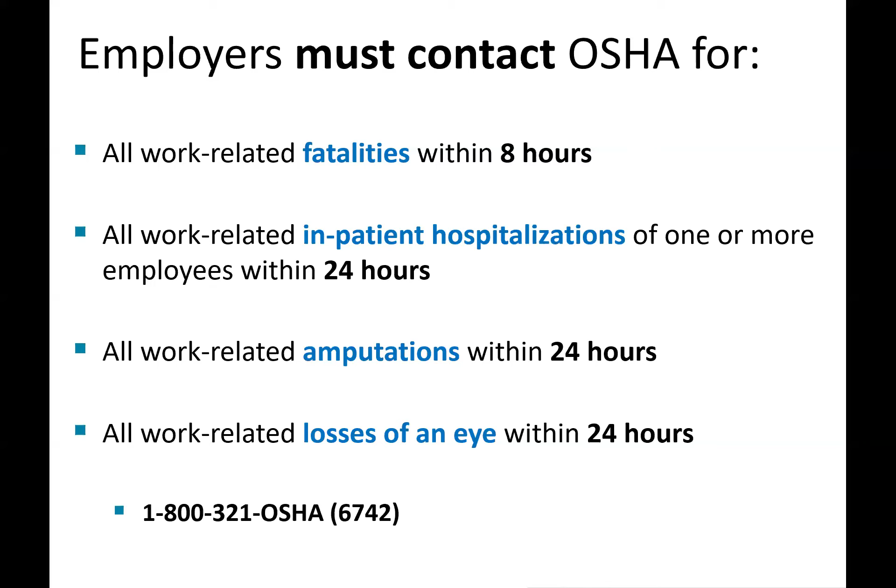If it happens after hours, depending on what you tell them, for example, if you said, hey, there's just been a work-related fatality at our workplace, they're going to wake somebody up or reach out through the phone tree until they reach somebody at the local OSHA office. So those are all parts of what's going to happen.

Then, of course, we're trying to figure out exactly how serious the hazard is that we might be looking at or that that employee might be exposed to. One of the statutory requirements is we have to show that the employer had knowledge of that situation or condition. And then, of course, we have to show that there's a feasible way to protect the employee. That ultimately falls on OSHA's responsibility to show that whatever we're going to ask the employer to do to prevent that hazard is actually feasible. So those are all parts of what will happen on an OSHA inspection.

So let's just take an example, because perhaps maybe even you've done something as silly as this, getting up on the top step of a ladder. We would see something like that as a hazard. But in order to say it's an actual OSHA violation, we have to go through those previous steps. Is there an employer-employee relationship? So if this is a person who works for themselves and doesn't have that employer-employee relationship, we would not have jurisdiction. Next, we have to show the seriousness of the hazard. And of course, a 6 or 8 foot fall hazard certainly rises to that occasion for us.

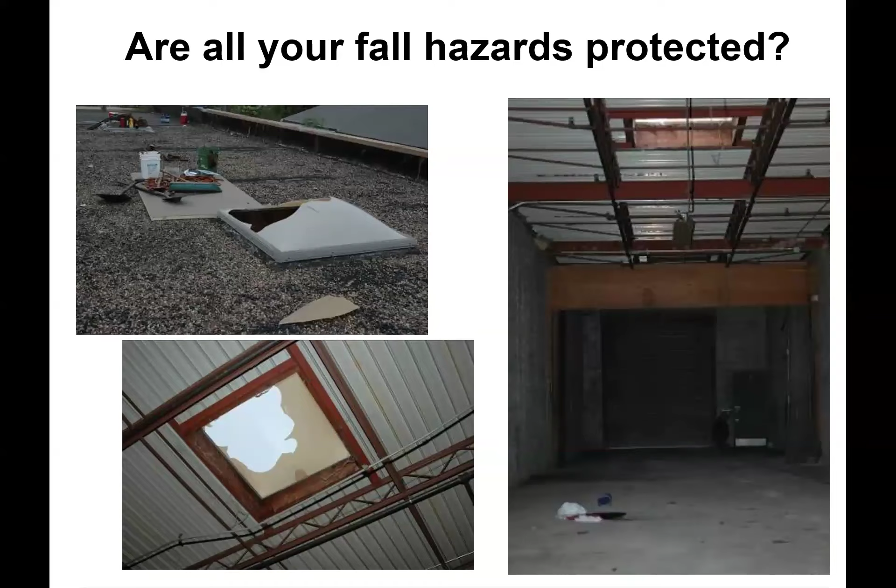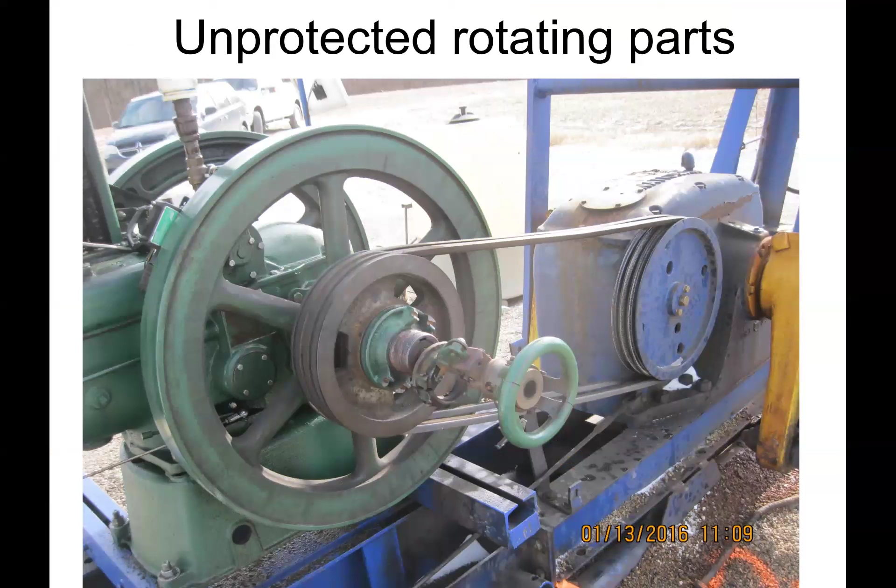We had an employee who was caught in rotating parts. This was another fatality investigation that we did. An employee who was engaging the clutch came in contact with those rotating parts. He ended up getting wound up in the material. These are the sorts of things we'd expect it to look like. We don't want to wait until there's a fatality to address those sorts of machine guarding hazards. So we'll address a lot of issues like that.

And then, of course, this takes us back to Illinois State University, actually on a Christmas day, where some ice had gotten behind the concrete near Hovey Hall. The concrete had broken off, and they were concerned about it falling down further. So they hired a company to come out and pick up the material. As they went to pick up the material, the strap that they used burst, and the concrete came into the cab and killed an employee. And so we want to make sure that anytime you are near, as a person who might be also inspecting those areas, and you see these sorts of things, you recognize that hazard.

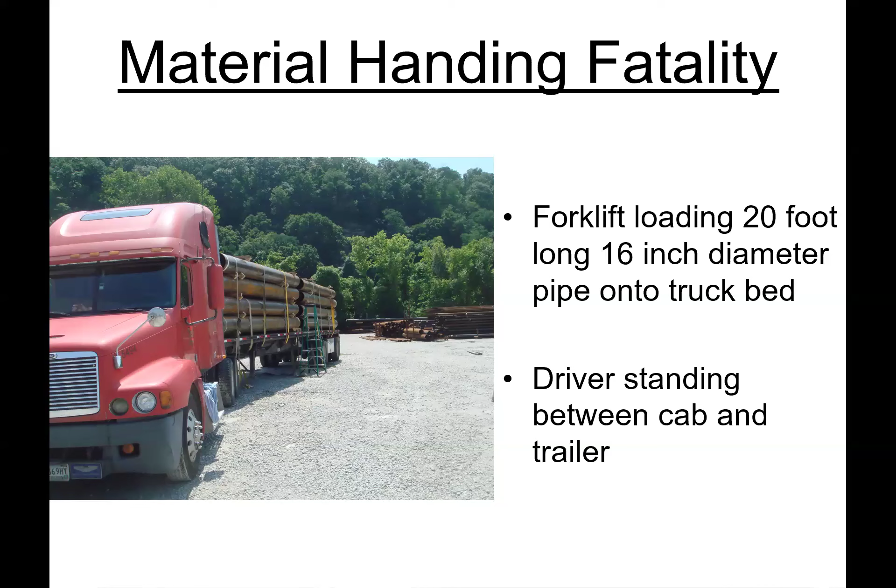In this particular fatality, the truck driver is standing between the cab and the trailer, just off to the side. As an employee goes to lift up the load, one of the straps breaks, that pipe comes down and crushes the employee. So we want to make sure everybody recognizes that anytime you're moving materials, you have the types of stuff that could become a crushing hazard. You recognize that and stay in a safe area for those sorts of things.

So those are all sorts of things that we routinely have dealt with fatalities that, to somebody who doesn't deal with it all the time, may be all too common and not recognized as a hazard. I wanted to share some of those horrible stories so hopefully everybody recognizes them going forward.

So let's talk about some of the common citations we've issued in the past for the types of work areas we'll be talking about today. Excavation hazards, we'll go through some of those specifics in just a second. We've already talked about the fall and ladder hazards we routinely see, including going into an excavation. If they put a ladder into the bottom of the excavation, we want that ladder to extend at least 3 feet over the edge of the surface to the level ground for that sort of stuff.

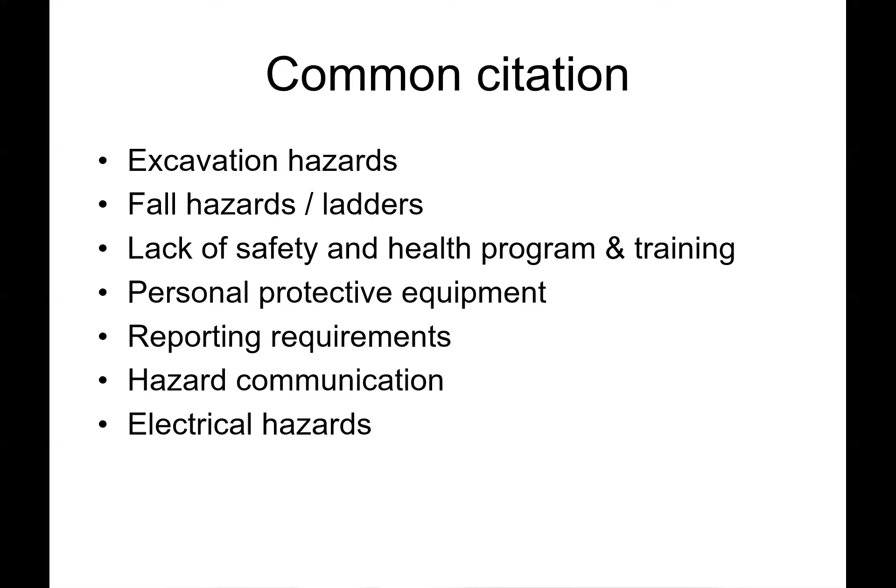Not having a basic safety and health program and training for employees is something we've often issued citations on. There are personal protective requirements that might be appropriate for the work they're doing. Reporting requirements, especially if they've had a severe injury that required hospitalization. Hazard communication, depending on if the employer is using hazardous chemicals at all during the work. Even sealers, some of the stuff like caulks, are considered hazardous chemicals. So we'll talk about hazard communication here in just a second. And then, of course, those electrical hazards that we've already touched on.

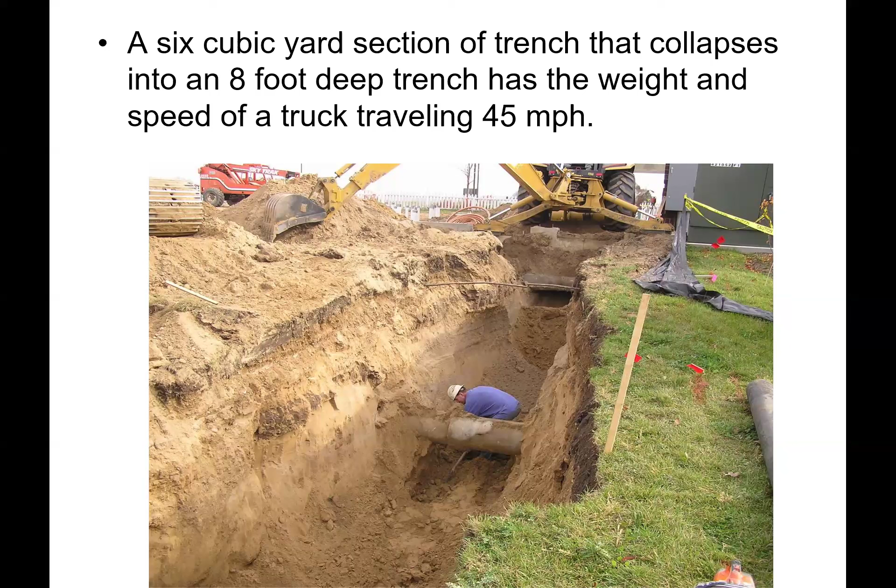So it's critical to make sure people recognize that we need to have a competent person who designs this excavation, making sure we have appropriate shielding, shoring, or sloping to keep people out of harm's way.

Typically, if you have plenty of space and don't have a building right next to it or things like that, we see a lot of people simply using the sloping method based on the soil type. But you have to be able to decide what that soil type is as you're doing that sort of work.

Anytime your excavation is even less than 5 feet, you still have to be doing those regular inspections. The OSHA standard absolutely requires one of those forms of sloping or shoring once you get 5 feet deep. But even at less than 5 feet, it still requires regular examination because, as I'll show you in a little bit, sometimes the excavation doesn't cave in totally.

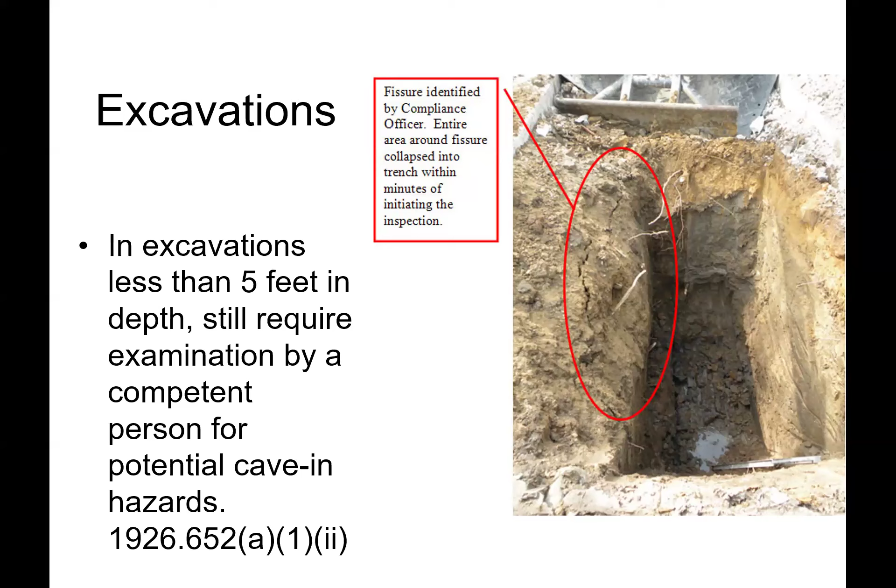Sometimes just chunks of material will fall off. So if you ever see any sort of fissuring or stuff like this, like you see in the circled area, those are some of the hot button items for us. You'd want to make sure you're protected or staying out of harm's way.

On the other end of it, we have what's called a plumb bob attached to a rope. And then, of course, we use basic geometry to show the depth of the excavation and that slope of that wall. We also have devices like an angle indicator that will tell us those sorts of things so that we know exactly what is the slope of the wall.

And then, of course, based on the type of soil that you have, that will determine what the appropriate slope or angles are. There's a test called the thumb penetration test that you can do to try to determine which type of soil you have.

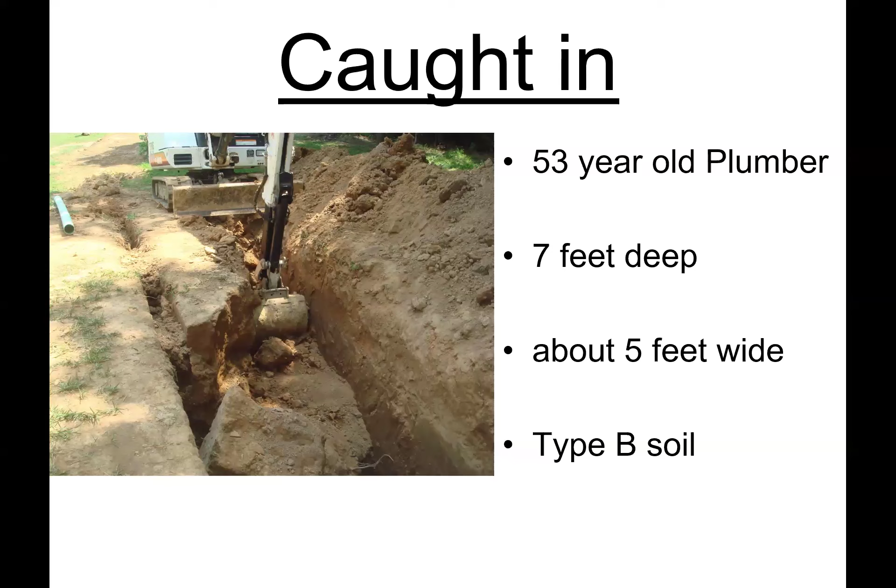He was able to get out of the excavation, but it was a serious enough injury that he ended up dying from the internal bleeding. So it's those sorts of things that, even though he may not have been covered up by the soil, there's all those sorts of things that can occur. We want to make sure people are certainly protected from those sorts of areas.

A couple other things we see with excavations: we want to make sure that anytime an excavation is 4 feet deep or greater, there's a safe way to get in and out of that excavation. A ladder is typically fine to use as long as you can safely use that ladder in and out.

What we don't want to see is people riding in those excavator buckets. We have a long history of serious injuries and fatalities from people riding up, down, and even horizontally for some distance in those buckets.

So that'll take you through some of the issues we've had with excavations. If you have any specific questions, feel free to write them in the chat, and we'll make sure we get those answered here at the end.

The other thing I touched on, a common OSHA violation, is the hazard communication program. It makes the top 10 OSHA violations each year. We expect that any employer using hazardous chemicals develops a list of what chemicals they have, ensures those containers are labeled, obtains a safety data sheet for the different hazardous products they have, provides training to employees, and has a mechanism to train employees on any non-routine tasks they might do from time to time.

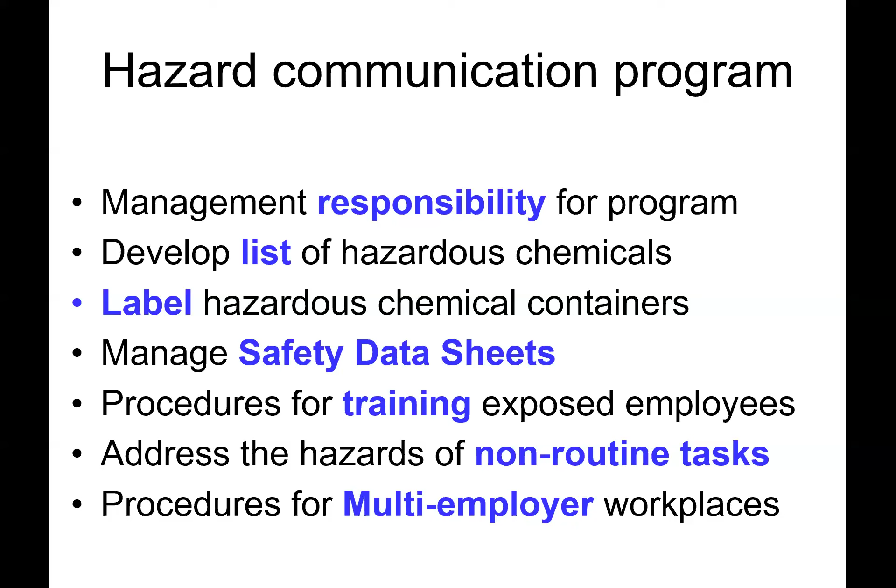And if there are separate contractors, say 2 or 3 different contractors working at a site, we would expect them to share information about any hazardous chemicals that the other employees might be exposed to.

In 2012, OSHA updated their hazard communication standard to include what we call the globally harmonized system. DOT, OSHA, all updated their labeling expectations to address that it's okay to use these pictograms in lieu of some of the basic words for the hazards.

As we talked about earlier with some of the electrical hazards, certainly one issue we run into is where are the power lines. We expect that the employer stays at least 10 feet away from the power lines at all times. If they say the work they're going to be doing will put them closer than that...

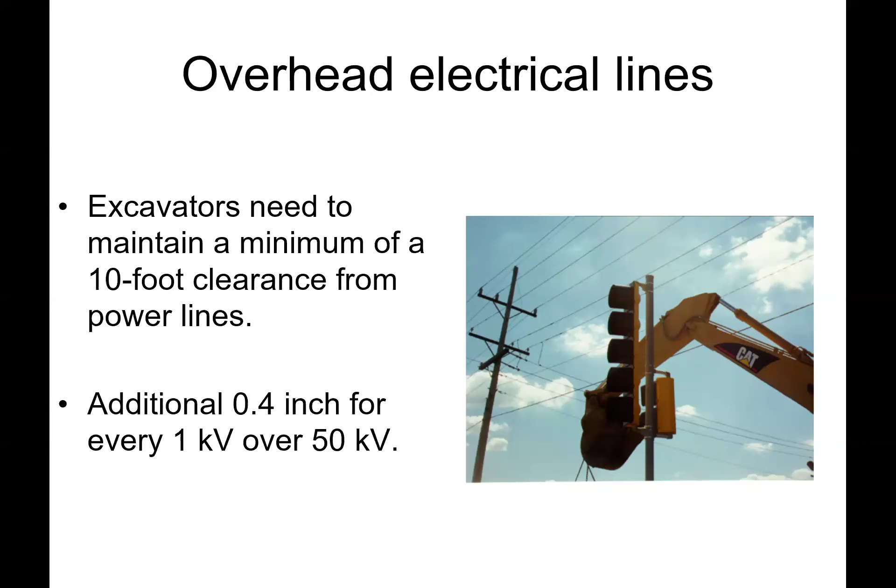If you're in central Illinois, you can contact Ameren. Throughout the state, depending on where you are, you can contact the local entity that has jurisdiction over the power lines, and they will either figure out a way to shut it off or cover it so it can be protected while they're doing the work.

The other thing we routinely look at is they may have a need for power at the site and are using a generator. Anytime you're working at a construction site, we expect the electrical to be protected with a ground fault circuit interrupter. Unfortunately, a lot of generators don't have a ground fault circuit interrupter built in. So in those cases, they make a pigtail that has a ground fault circuit interrupter, and they can plug in any electrical equipment they need into that pigtail to provide safe electrical power throughout that work site.

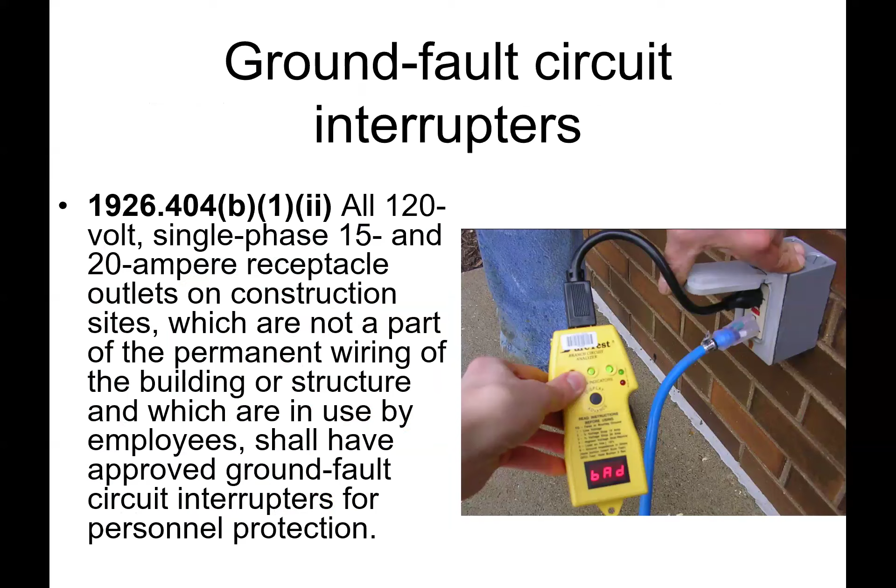As you heard earlier, one of the top 4 things that kills people is electrocution. So it's not unusual for us to check to make sure that ground fault circuit interrupter is working and working appropriately. The other thing we always look at is the extension cords that happen to be in use.

The other things that can come up are employees being exposed to injuries when there's a problem with either a piece of equipment or something going on in that work area. We want to make sure that while they're trying to do any sort of unjamming of the equipment or any servicing activity, that piece of equipment is locked out.

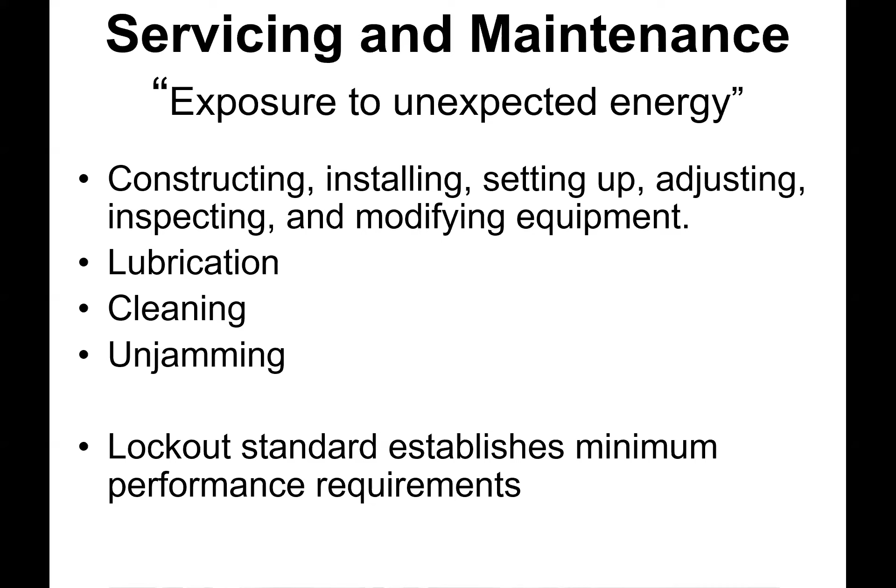So it will not present a hazard to the employees as they're doing that work. Lockout can apply to construction activities, but it's usually during cleaning and unjamming activities that we see the most significant amount of hazards.

The basics of lockout is we expect there's a program or system in place to make sure those energy sources are isolated, and that the employer does a check to make sure that energy is no longer functioning. It's easy to recognize when electricity is no longer on, and here's our test.

Oftentimes, if it was something like a furnace, we can shut down the gas line and then burn the rest of that fuel out of that pipe. But there are ways to release or relieve it. And so those are the sorts of things we want to make sure people are doing so that there isn't a hazard in the workplace.

Next, I did want to touch on confined space because it's always one of those things you could encounter, and I just wanted to give you a couple of examples. The basics that we see related to confined space fatalities—oftentimes it's because they didn't recognize the hazards. Other times, they recognize there was a particular potential for a hazard and they don't eliminate it.

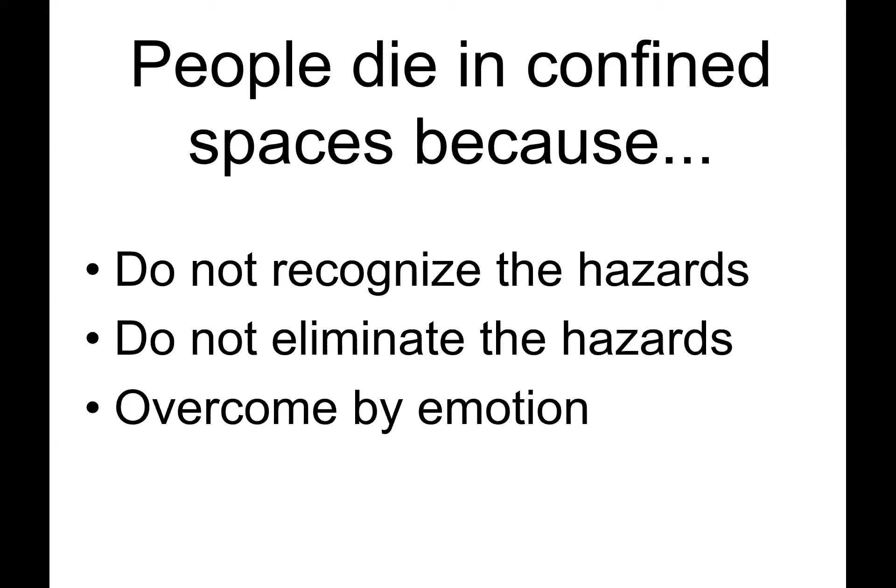And then the third way people unfortunately die is they're overcome by emotion. You've probably heard stories where there was a manure pit, they see somebody down in there, and another family member tries to go down and save them, and they also end up dying from, say, hydrogen sulfide or something that happens to be in that space.

So it's critical to make sure employees recognize in confined spaces the proper steps. Part of the reason I wanted to share this with you is so that you recognize you can't just jump down in there and try to save them. You have to take appropriate steps, like calling emergency services, who will have the ability to put on an SCBA and go into an area that has a hazardous atmosphere.

So we'll talk about our first one here. This is a concrete vault. They had performed a patch—you can see on the right-hand side—where they had a hole after installing the piping system, and they put the patch on that Friday. Over the weekend, they put this lid back on the opening so that none of the neighborhood kids or anybody would get into that area. Then Monday they come back to check on it. The employee climbs down into this vault and faints.

And the employer does not have a good rescue practice in place. They did call 911, but by the time the fire department got there, was able to package the employee up and get him out, he died from that inhalation hazard. So what we have to look at is what caused this inhalation hazard.

Concrete is a notorious oxidizer. And if you remember your 5th grade science, oxidizer means it's using up the oxygen. So as that concrete dries, it uses up the oxygen in the space. So in the simplest form, there wasn't adequate oxygen in the space.

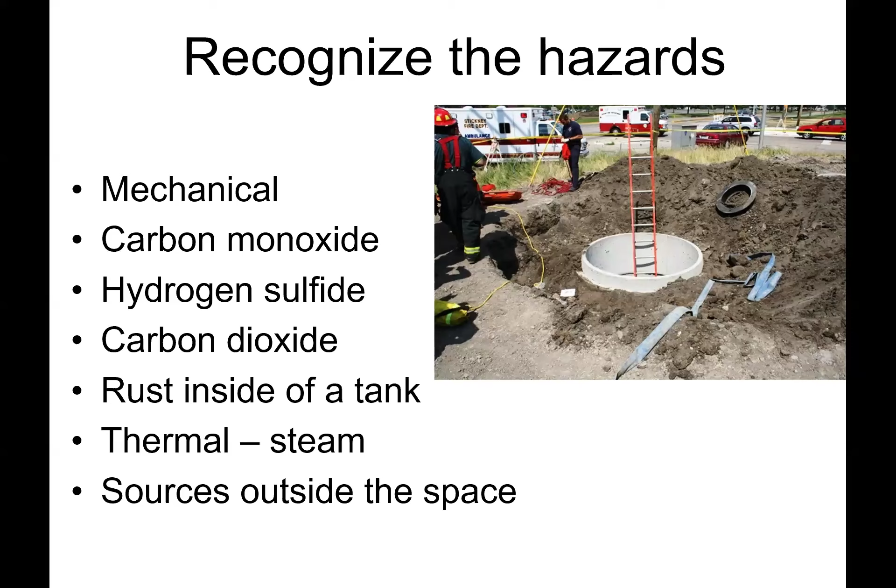Anytime you see rust inside of a tank, that's the same thing we're looking at with this concrete, right? Rust is using up the oxygen, and that's always a concern for those sorts of things. And then, of course, depending on what's in those lines, if you happen to have steam or things like that, if released, that could present an immediate danger to the employees. Those are all the sorts of things we want to make sure people recognize. And then, of course, you could have sources from outside the space that could cause that.

So I did want to share one other story. This involved two employees servicing an irrigation well in Havana, Illinois. That's what it looks like inside the space. We'll presume in this particular case that they did do an air sample. They had a device and the opportunity to do air sampling. They didn't write down what the results were, but we'll presume for the sake of the story that they had done air testing and it was fine, because it's very plausible that it was.

But when the first employee goes in there and does some work, there's some rotting leaves and a slurry of liquid and mud down in there. As you walk around in this area and do the work, it's not unusual for you to release some level of hydrogen sulfide. Hydrogen sulfide's immediately dangerous to life and health level is 100 parts per million, which is a relatively low limit for those sorts of things.

Perhaps the first person simply fainted. His friend and co-worker sees the employee go down and immediately jumps down there to help him. We ended up with a double fatality, with both employees asphyxiated by hydrogen sulfide that quite possibly initially didn't even show up on their air monitoring results.

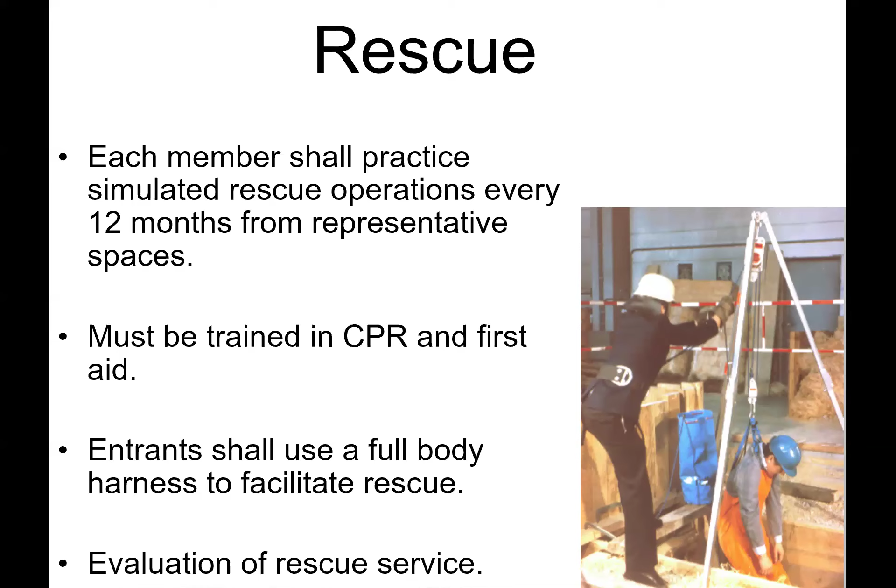So it's critical to make sure that not only are you doing the air monitoring, but you have a good way to rescue, and then do regular checks. When we talk about rescue, like the tanks we've just seen before, they make a wide variety of different tripods that can be used with mechanical assist to quickly pull that person out. OSHA requires them to at least practice that activity from a representative type of space at least once a year.

It's called Table 1 of our silica standard, which spells out specific protocols. So if you're using a saw integrated with a water system that continuously feeds water to the blade, and you're using it outdoors for less than 4 hours, we don't even require you to wear respiratory protection.

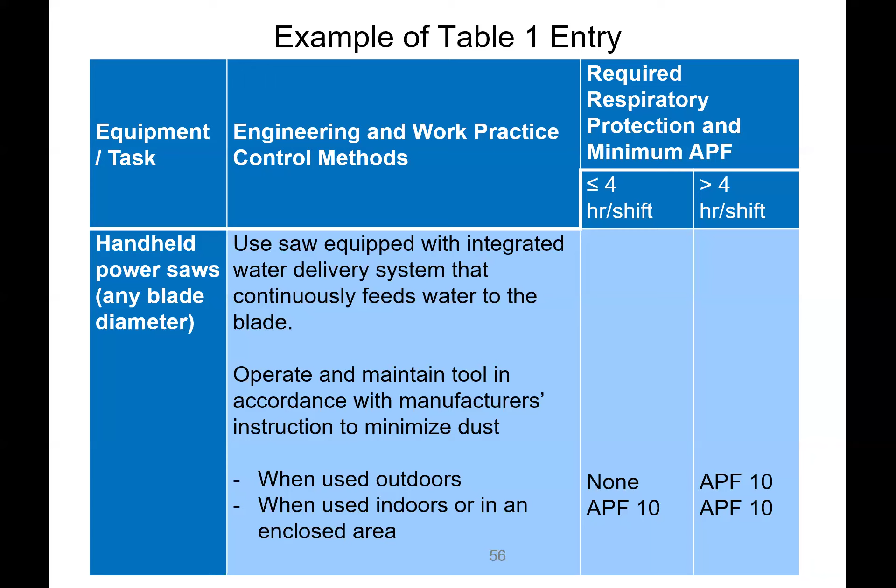But if you're going to be doing it for more than 4 hours, or you're going to be doing it inside, we want to make sure, even though you're using the water, that you're wearing appropriate respiratory protection. And we have some guides that will help employers for doing those sorts of things.

Noise, as we talked about, is also a significant issue for us. If employees are exposed as a time-weighted average above 85 decibels, we want to make sure that they're included in what we call a hearing conservation program, which includes a regular audiometric test for the employees, making sure they select the right type of hearing protection for those exposures, whether it be plugs or muffs or both if it's super high levels of exposure.

And then, of course, every summer, we end up trying to deal with heat as effectively as we can. This last summer, the agency actually put out a proposed standard recommending a written heat illness prevention program that addresses acclimatizing new workers, making sure that there's a clear plan of action to make sure that people are drinking water, are being appropriately hydrated, making sure that everybody understands the signs and symptoms of heat-related illnesses,

and that there's a system in place to check on workers that would also make sure that if an employee does initially start to have signs or symptoms of heat-related illnesses, you have a plan of action to get them checked out by a medical professional, and/or if something worse happens, a good plan of action for emergencies so that you can get them to the medical professional quickly. And then ultimately, everybody has an understanding of here's how our process is going to work at our workplace.

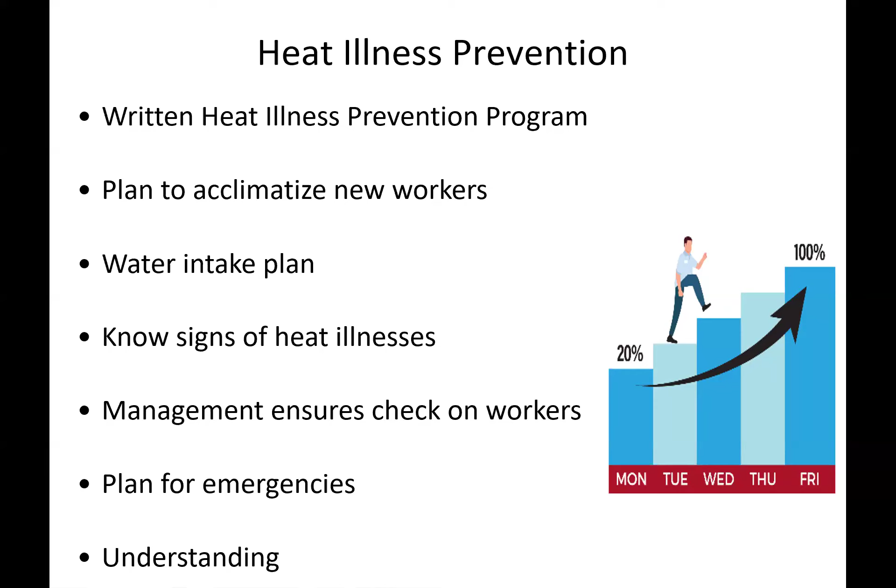And so the same thing would apply to you guys as inspectors who are out there working in a hot environment for those sorts of things. We want to make sure that you're appropriately protected as it relates to these issues.

Now, obviously, I can't make you an OSHA expert in less than an hour, but if you do end up having questions, whether it be on any aspect, or you're just concerned about a workplace that you've run across in your work and want to ask, is this something we should be making a referral on? By all means, here's my direct line. And that's my email address. You can contact me and I will certainly get back to you as to OSHA's policies and/or our practices, or help make a referral if that's appropriate.

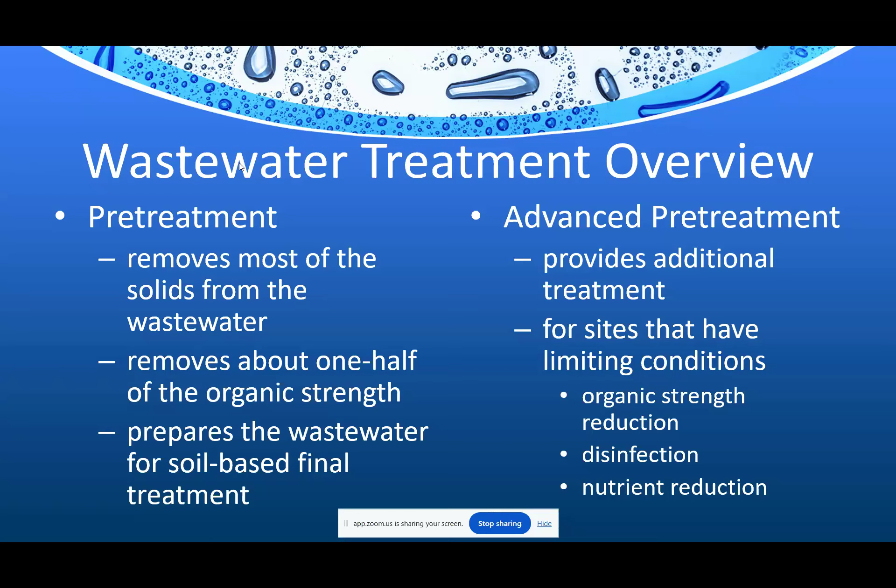We use the term strength to indicate the concentration of contaminants relative to average conditions. We expect that the rural convenience store that serves fountain drinks and greasy foods would have a greater concentration of organic compounds, sugars, and fats in wastewater. This wastewater would be considered high strength relative to organics. So we have basic treatments here, pre-treatment and advanced pre-treatment. What do we do to treat those? How do we go about doing it?

Then, final treatment for on-site wastewater treatment systems that use the soil. For final dispersal, the soil provides final treatment. There are billions of hungry microorganisms in the soil that like our wastewater. They break down many of the complex compounds into simpler, less toxic forms, such as carbon dioxide and water. So again, once that goes into the soil, that natural biology starts to take place and begins breaking all those down.

So, talking about a conventional treatment train. The word conventional is often used to describe an on-site wastewater treatment system that serves a single residence. The wastewater flows through the system by gravity, and the system consists of a collection network, a septic tank, and a soil treatment area. So you'll have your house, your septic tank, and then your drain field and soil treatment area where that water is being treated. Those microorganisms help break it down once it comes out of the septic tank, where some treatment is also taking place.

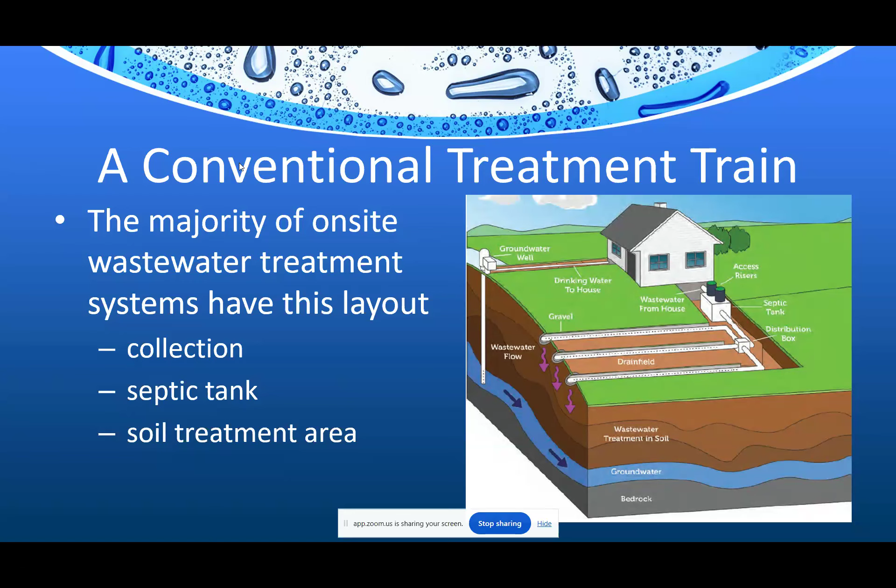Wastewater collection is the first step. The drain waste vent system in your house provides the service. Wastewater is then carried out of the house by the building sewer that conveys the wastewater to the next component of your treatment system. What are the ways we generate wastewater? Baths, we launder our clothes, we wash dishes, and of course, we dispose of the byproducts of our metabolism.

We often hear the terms black water and gray water. The terms only become important if we want to think about water reuse. Black water is from the toilet, kitchen sink, and dishwasher. The water contains pathogens and our heaviest concentration of other waste products. Gray water will contain more soaps and detergents. So again, thinking about those different types of water and what we want to consider when we think about reuse in the system.

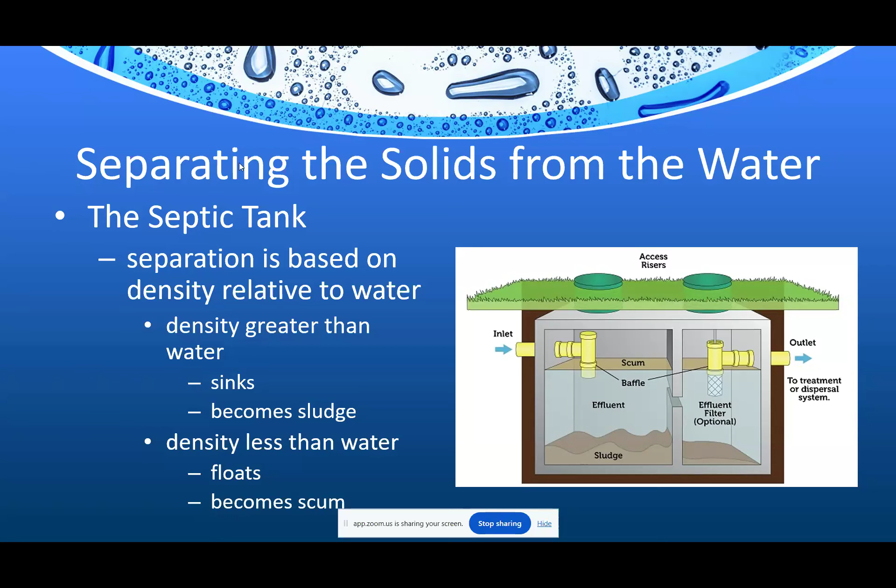Talking about inlets and outlet baffles. The liquid enters the tank through the inlet baffle. This baffle forces the water downward to encourage the settling of solids that are more dense than water. Solids that are less dense than water will rise. Solids that sink become sludge at the bottom of the tank. Products that float become the scum layer.

So again, thinking about your septic system there, we have that diagram there. You eventually separate it into the three layers where it comes out of that baffle, and then it separates. So you have the effluent in the middle. The bottom, those things that sink, eventually become sludge, and the top eventually becomes scum.

And that separation becomes really important because that's helping you separate out the negative things that you have within that septic tank. So a good septic tank, when it's doing its purpose, is exactly that. It's helping separate out those solids into that scum and sludge layer. So we have that effluent that can be treated through the septic system.

If the system is operating properly, the layer of water between the sludge layer and the scum layer will have the lowest solid content. The outlet baffle is placed so that only water from this clarified zone is allowed to leave the tank. So again, we had those two chambers here.

In the first chamber, we're doing our separation. Then we're letting that effluent flow, which has the lowest contaminant level, into our second chamber, which is then going out of the outlet baffle, going up into the other baffle, then out into the treatment field where the soils will start treating that effluent and getting out whatever remaining contaminants might be in there.

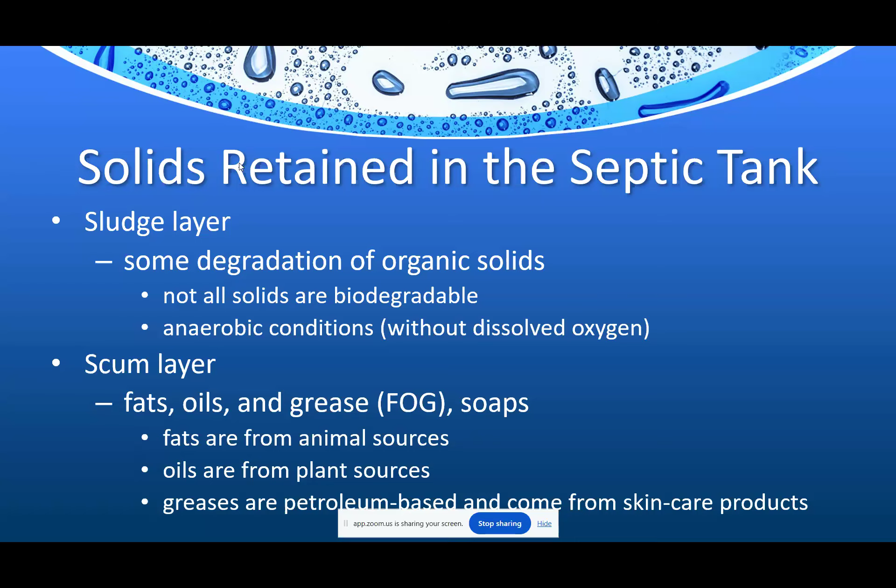We then have our clarified layer. The entrance to the outlet baffle is placed in the clarified zone. Some septic tanks have an additional screen built into the outlet baffle, some don't, depending on the age and exact model you have. The effluent screen provides an extra level of protection to prevent smaller solids from entering the soil treatment area.

We'll talk more about those screens, but the big thing to think about is that if you have one of those screens, you're preventing anything that could have floated through that effluent layer and gotten in there without being fully separated into the scum or sludge level.

As previously mentioned, some homes and businesses can produce wastewater that is too strong for the receiving soil. In these cases, additional pretreatment is added to the treatment system to reduce the strength.

You do have some of those pretreatments, which may involve a little bit more disinfection or a little bit more nutrient removal, as opposed to just doing it naturally.

We talked about organic strength reduction, often called ATUs. Aerobic treatment units provide ideal conditions for aerobic, oxygen-loving bacteria to break down organic compounds. Air, which contains about 21% oxygen, is bubbled through the water, allowing oxygen to dissolve into it. The dissolved oxygen supports bacterial activity. As organic compounds are oxidized, they are reduced to simpler forms such as carbon dioxide and water. The bacteria have plenty of food and oxygen and thus reproduce at a rapid rate.

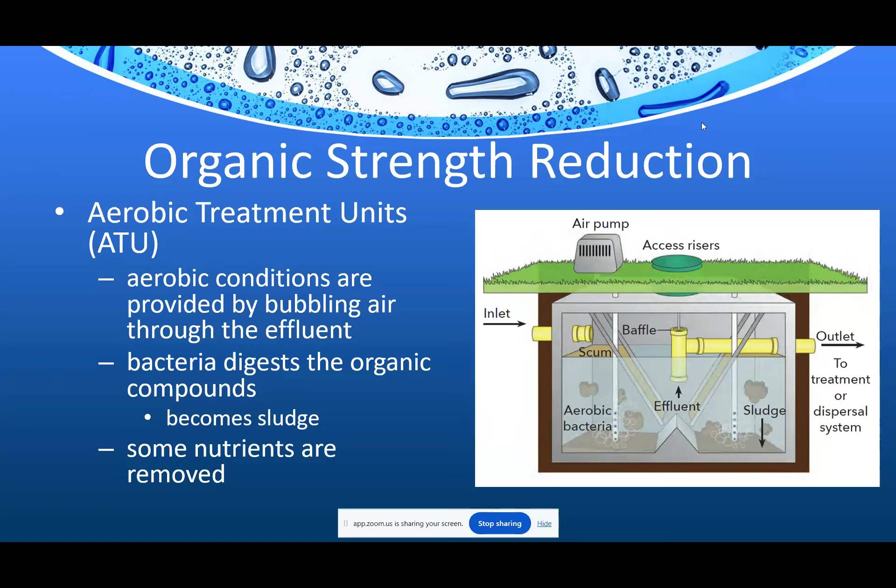Again, that's why we talk about the importance of pumping septic tanks a lot, and we'll talk more about that later. One of your main issues is that sludge is not going to break down over a period of time, so you want to make sure you're doing your best to get that sludge out of the septic tank so it doesn't have an effect on your microorganisms in there.

Talking about organic strength reduction, media filters provide the same aerobic treatment as an ATU. The primary difference is that the bacteria are attached to the media and the wastewater trickles through it. As the water trickles through the media, oxygen and organic compounds diffuse from the water to the bacteria. This system has the advantage of not needing an air pump to aerate the water.

The disadvantage is the biosolid sludge can accumulate in the media. Just as ATUs need to have sludge removed from the bottom of the tank, media filters may need occasional media cleaning or replacement to keep the system operating properly.

Again, looking at constructed wetlands, they are another means of providing advanced pretreatment. Wetland plants that can grow in saturated conditions grow in the media that allows water to flow through just beneath or just above the surface. Because the water is at or near the surface, oxygen can easily diffuse into the solution, creating aerobic conditions. The plant roots provide good support for beneficial bacteria to oxidize organic compounds.

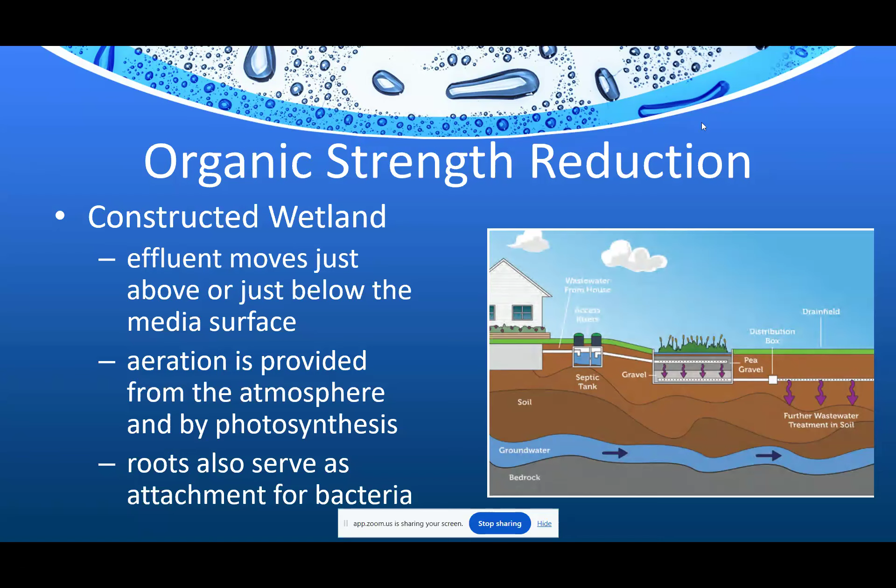Aerobic treatment units are common methods of reducing organic strength, but they are not the only method. Media filters are a second common means of reducing organic strength. We suggest that you cover aerobic treatment units and media filters as advanced pretreatment devices. If you feel no one in your community has a constructed wetland, this won't be super relevant to them, but we do see them every now and then.

Disinfection, in general terms, means the destruction of pathogens, which is different from sterilization, the destruction of all microorganisms. Disinfection is provided when there is a great risk of human contact before the natural die-off of pathogens occurs. Such cases include spray dispersal systems, septic systems adjacent to lakes, and systems in sandy soils with shallow groundwater.

E. coli is used as an indicator of the potential for pathogens. The assumption is that if no E. coli is present, then the risk of pathogens is very low. That's pretty basic there.

Chlorine is generally the go-to compound for disinfection. That's kind of across the board for everything, water and wastewater, that chlorine is going to be used for disinfection. A common means of adding chlorine to an on-site wastewater treatment system is to install a tablet feeder. You're adding those small chlorine tablets as needed. 3-inch diameter calcium hypochlorite tablets are placed in the feeder where the chlorine can dissolve in the water. Additional tablets must be added as the old tablets dissolve. Kind of almost like a swimming pool has these as well, would be your best example. You're going to have those chlorine tablets and add them as they erode over time. You're going to replace them to make sure that chlorine is getting into the water and that the disinfection is allowed to happen.

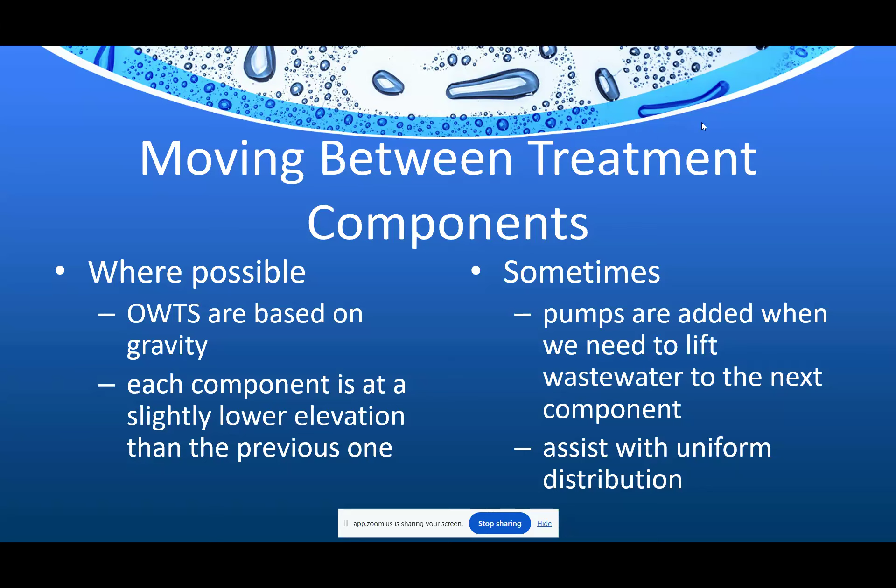So talk about moving between treatment components. Water flows downhill, and gravity is the least expensive way to move wastewater. Not every home site has sloping ground, and sometimes the best soil for the final treatment is at a higher location. Lift pumps are used to move water uphill. A second application for pumps is to provide water pressure for pressurized distribution systems, which will be discussed in a few minutes. If you're going to be moving between components, using gravity is going to be your best bet. Gravity doesn't blow up, gravity doesn't have pumps that go out, and if you lose power, you're not going to have a backup issue there. But we do understand that if it's not possible for some homeowners or some sites, potentially using those pumps and lift stations to move that water is something that is a possibility.

So, pumps, pump tanks, and controls. A pump requires a pump tank and pump controls. The pump tank allows for the accumulation of effluent so that the pumps do not have to operate all the time. It allows the pump to take a break, because you'll run your pump out, or it'll blow up if you keep it going constantly.

Typically, the tank is sized to hold a volume equivalent to 2 days of water usage. The volume allows for the time needed to repair the pump system in case of failure. Most pump systems have a high water alarm to notify the owner if the pump has failed. We'll see these, and if you do have a pump, having that alarm is pretty vital, because it will allow the homeowner or anyone on site to know that water is getting too high, and that your septic system is starting to fail because you're having a bit of an overflow from that pump failure.

Talking about pump tanks, the pump and the control: the controls are maintenance items themselves and must be accessible from the surface. All items associated with a pump system have a maintenance requirement. As such, please reinforce that pump systems must be accessible for maintenance and repairs. You would be shocked at the amount of people who, if they don't like the pump, try to bury it or put it underground, basically making sure it's not accessible because they don't think about it. We see this as a larger problem, especially with septics in general, where we understand they try to hide them, but in doing so, they sometimes eliminate the accessibility of them, which is obviously a problem when they start to fail.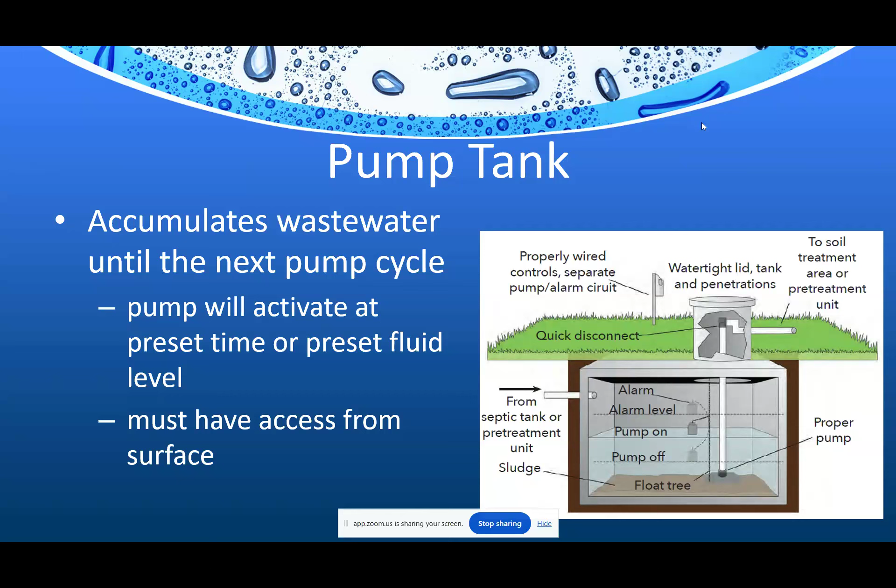The typical wastewater lift used for on-site wastewater treatment is a submersible pump, and it's less than 1 horsepower. This means they do not need to be primed, and there's minimal electric power consumed by the pump system itself. So again, we're talking about a very small pump if we have one in there, and that does help it last a little bit longer too.

So we have our controls, our floats and timers. The controls should be in a weatherproof control panel. Again, it's pretty obvious, but you'd be shocked at the amount of people who get that confused. Most pump systems have one or more floats to activate the pump and to activate the alarm. The electric leads from the floats should terminate into the control panel.

Although not usually required, it is strongly recommended that pump control systems include a pump timer and an event counter to provide information about the operation of the pump, so you know how long that pump has been running. If you have a timer on there and it looks like it's been running constantly, you kind of have an issue within that.

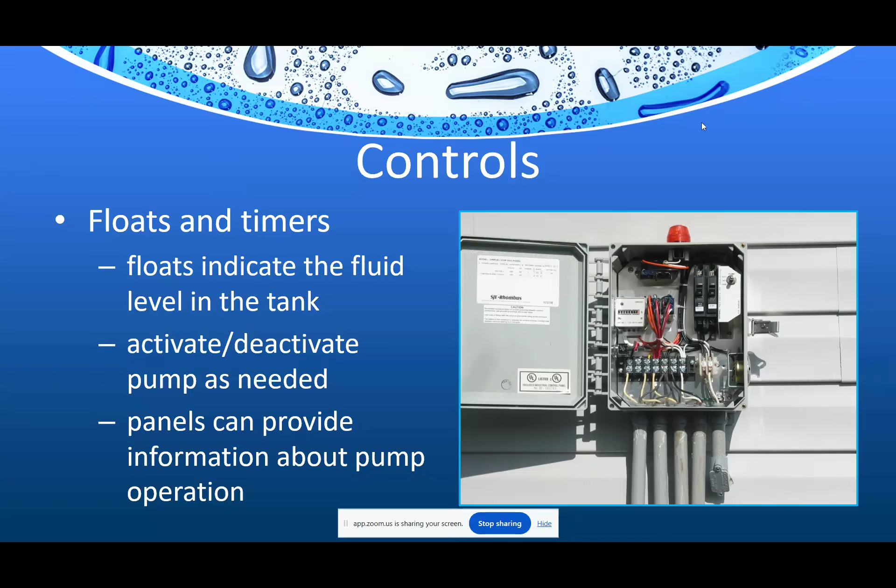After pre-treatment, the effluent moves to the soil-based final treatment. The soil is the ultimate wastewater treatment system. This is where the majority of those contaminants are going to be broken down. Municipal and on-site scale systems are engineered devices trying to mimic the soil.

However, the soil must be able to pass the water. The first step in determining the suitability of a soil for final treatment is to determine the rate by which water can move through the soil. Most locations no longer use the percolation test to make this determination. Rather, trained soil evaluators look at the texture, structure, and depth of the soil to determine its ability to move the water and provide final treatment.

Again, if you have that soil and you're worried that it's not going to be able to move through, having someone do an assessment to make sure that water can move through there—and also that it's not moving too quickly, that it's moving at the proper rate—is vital.

Again, the soil is going to be a complex media. The soil supports microorganisms that can degrade organic compounds, contains inorganic compounds that can bind with phosphorus, has porosity so water and air can move, and allows for the plant uptake of other nutrients. So a suitable soil allows for biodegradation, nutrient conversion, binding with minerals, plant uptake, and deep percolation of the water.

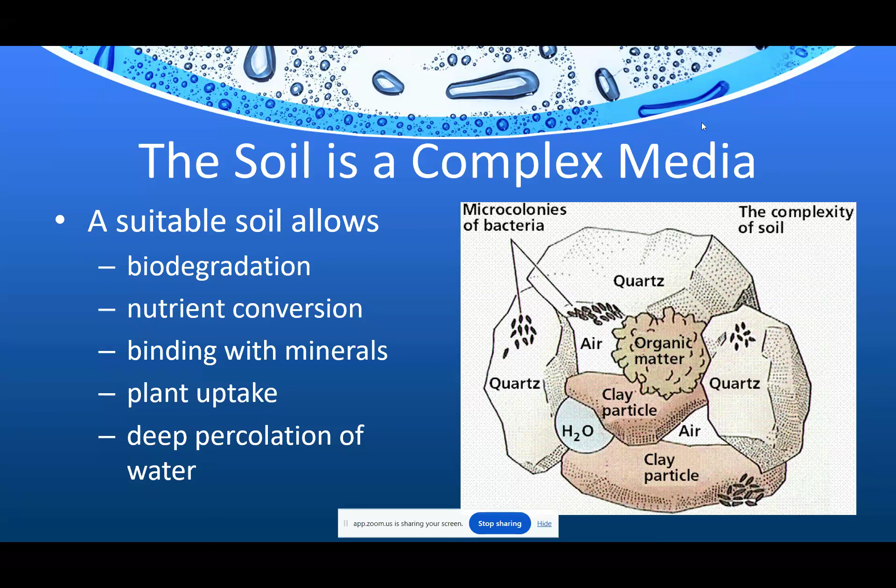So that's kind of what we're looking for—those drain fields that the effluent's going to go into eventually and move through the soil. This would be your perfect mix.

Applying effluent to soil: soil-based wastewater treatment systems use trenches or other types of excavations to place effluent in the subsurface soil. A trench refers to an excavation that is 2 to 3 feet wide and is partially backfilled with a media that provides porosity, an open void that allows for the storage of effluent. This storage is needed for times when the inflow of water to the trench is greater than the outflow of infiltration into the soil. So again, you have your trench-based dispersal, and you want to make sure that everything is being dispersed properly.

Dispersal into the soil: by placing the effluent into the subsurface environment, we are putting a barrier between us and our waste for public health, and placing our waste in a location where renovation can take place, thus protecting environmental health. Again, we are basically trying to make sure that we're not going to make anybody sick by getting rid of our wastewater. We want to make sure it's treated as properly as possible within the septic tank.

Those solids are separated, and once it goes into the soil, we want to make sure it's going somewhere where it can actually be properly broken down and eventually be reused or get back into the water system. What we don't want is to be dumping those chemicals, solids, or any sort of contaminants back into the soil and have them go straight through into the water cycle without anything happening, without any microorganisms breaking them down. That is how individuals can get sick.

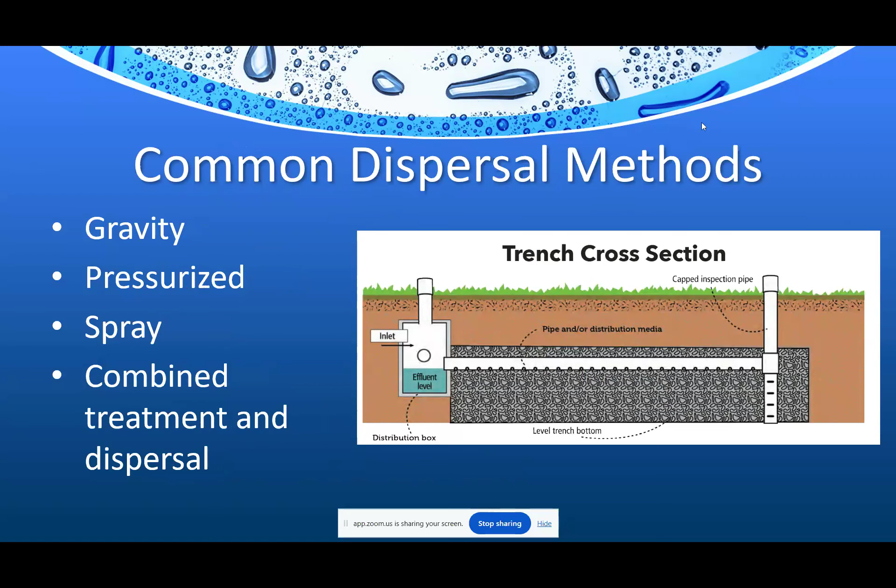Here you have your conventional septic systems. Most on-site or wastewater treatment systems are considered conventional. This means that water moves between components and through the soil treatment area by gravity. These are trench-based systems where effluent enters one of the trenches and moves to the opposite end. Effluent is continually infiltrating along the trench length, so more infiltration takes place near the beginning of the trench. As more effluent enters the soil, there is an increased accumulation of biological material or biomat that limits the infiltration rate. As the biomat forms and the infiltration rate is reduced, water can move further down the trench for rapid infiltration. Because water can only enter the trench from one location, that location does not get an opportunity to dry out.

Throughout Illinois, doing our inspections and assessments, this is what I have seen most commonly. Every now and then you will see an anomaly, but I think this is what the majority of homeowners have.

You do also have low pressure pipe systems. A low pressure pipe system is a solution to the poor distribution found in the conventional system. The system still has a trench system and media that provides more storage in the trench. A pipe, typically 1 to 1.5 inch diameter PVC, is placed in the trench. This pipe has small perforations, 3/16 of an inch, typically spaced every 60 inches. These perforations or orifices distribute water along the entire length of the trench. This is a pressurized system, so a pump or a dosing siphon is needed to provide the pressurization.

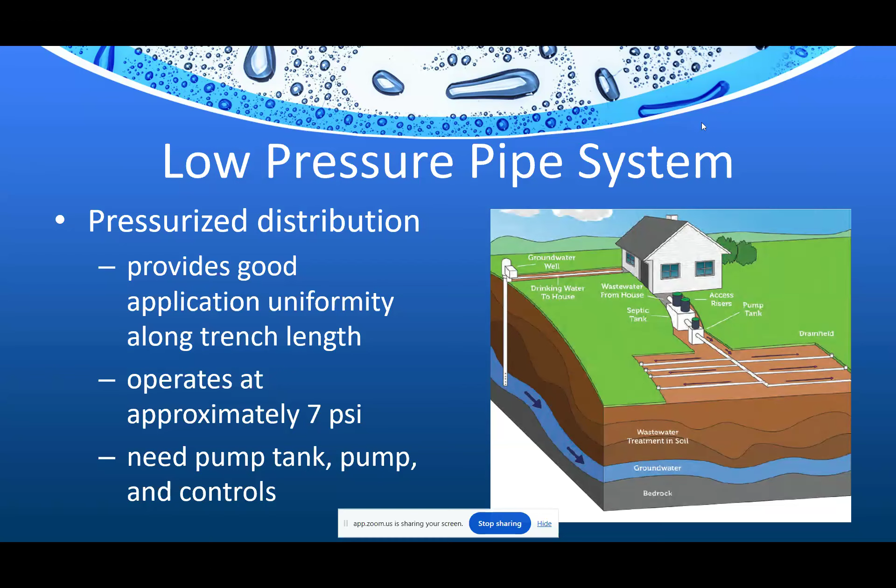There are drip distribution systems for some sites with limiting soil conditions. These are used if you have limited soil, if you're in a smaller area, or that soil is not going to work as well. A distribution system using drip irrigation technology may be a solution. With this technology, some regulatory jurisdictions will allow less than suitable soils to be used for final treatment. The drip system provides a precise application of the effluent to the soil. A drip system requires filters to be installed just after the pumps. This technology requires maintenance, so a little bit more work than your traditional trench system. You're going to have a little bit more maintenance on it, but it is an option if you're running into issues with those soils.

Spray fields are also an option. Spray irrigation is another means of allowing less than suitable soil to be used for final treatment and dispersal. Not everyone allows these, it's all kind of dependent on where you are. Pop-up sprayers are commonly used at a location that allows spray dispersal. Most require that the effluent be disinfected. The spray field is fenced, and the spraying takes place at night.

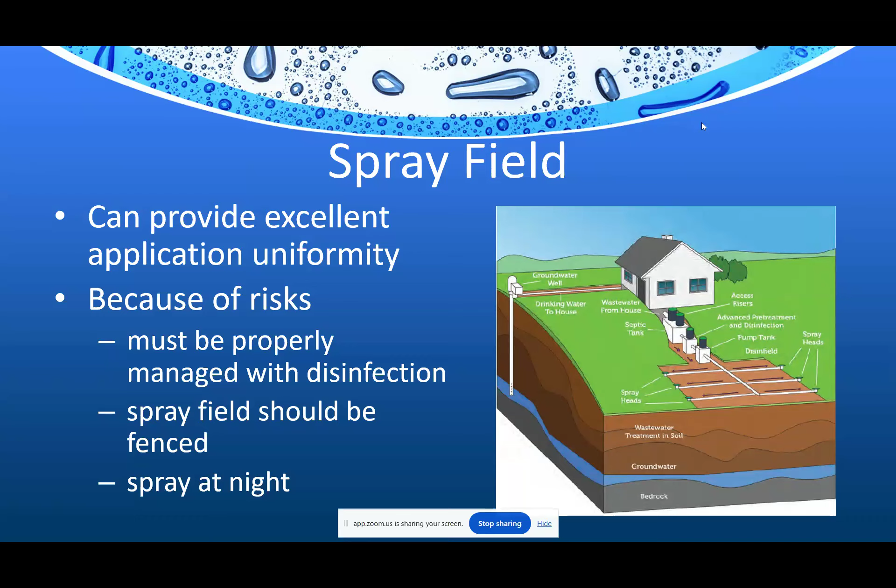Combined treatment and dispersal systems provide additional treatment in the subsurface environment, often used in low permeability soils where the addition of organic matter and solids from the wastewater could further reduce the permeability. These systems help extend the life of the infiltrative surface.

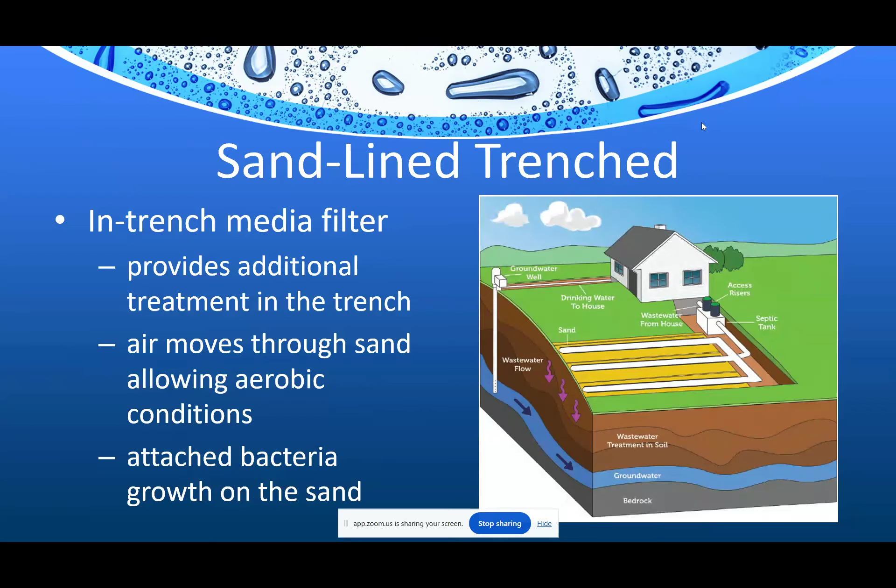Sand-lined trenches provide a very similar treatment mechanism as a media filter. Effluent is distributed along the length of the trench. The effluent trickles through the media under aerobic conditions. This provides additional organic compound removal, some nutrient transformation, and additional solid filtration.

You also have mound systems. Mound systems were the original combined treatment dispersal system, used in order to get additional separation from a limiting layer, groundwater, bedrock, or heavy clay. Mounds of sand are raised, and the effluent is allowed to trickle through the media. The mounds are covered with native soils and planted in native vegetation.

There are non-soil-based dispersal systems that return effluent back into the water cycle. Again, not a lot of these, but we do see them every now and then.

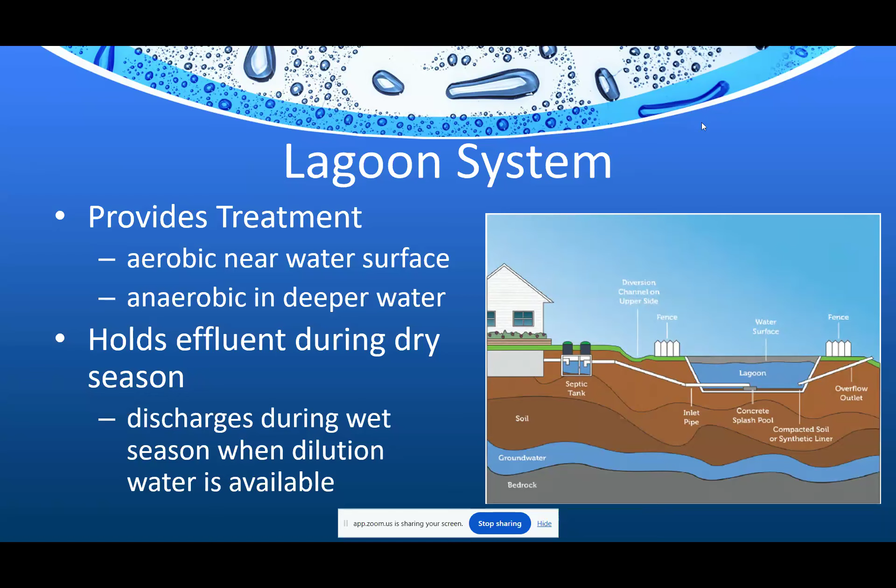You have your lagoon system here. A few regulatory jurisdictions allow lagoons for residential on-site treatment systems. Lagoons have a long retention time, allowing for slow treatment of effluent. The typical practice is to hold the effluent during the dry season and then release it during the wet season when there is plenty of dilution. At locations that allow lagoons, it is typical for the regulatory agency to require homeowners to have 5 or more acres to provide a significant buffer from the neighbors. So again, not super common, but if a homeowner is using a lagoon system, they need to have a significant amount of space for that.

So again, evaporation beds. I haven't actually ever seen one of these in Illinois, not really a big one. Direct discharge, again, we don't see a lot of this either. We like to see some treatment. So that is this section, and we will move on to section 2 here.

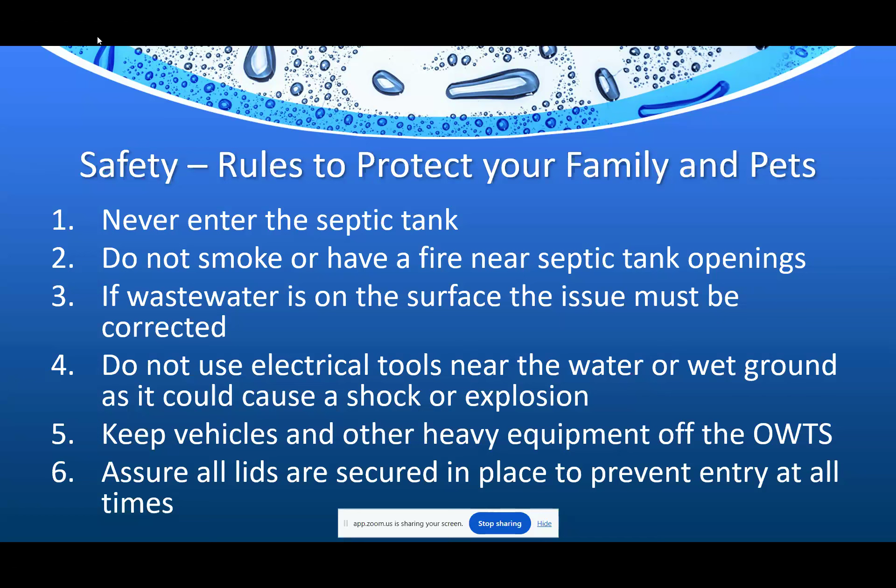Hiring - you want to hire qualified professionals to clean out tanks, service advanced treatment systems, evaluate the soil treatment area, make repairs, sample the system, and report results to the permitting authority if required.

But again, for homeowners especially, what we want to promote to them is do not do this work yourself. You want to make sure that the professionals are the ones doing it.

Talk about septic tank maintenance, frequency of pumping. All septic tanks must be periodically pumped, cleaned to remove floating scum and sludge that accumulate. If either floating scum or sludge is allowed to enter the soil treatment system, it will cause expensive and possibly irreparable damage. The pumping frequency depends on its size, use, and operation condition.

Septic tanks for a single-family home are typically cleaned every 2 to 5 years, but be sure to check with your jurisdiction about when it may be required or needed based on your unique system and uses. So yeah, 2 to 5 years is recommended, and it's definitely what we need.

There seems to be a mentality out there from homeowners I've dealt with that this is more of a recommendation, and I kind of try to tell them, no, you need to have at least someone come and check it every year. I've had some say, I've lived here 10, 15 years, we've never had a pump, it's never been an issue. You're like, well, no, it's an issue that you're not seeing yet. There could be issues occurring.

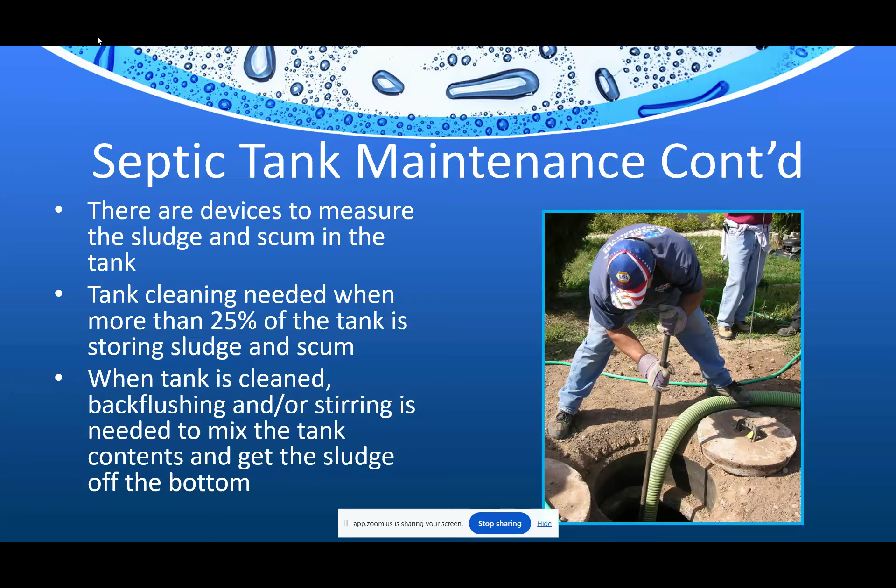So tank cleaning with correct access. When the tank is pumped, be sure to have the contractor check for leaks and make sure the baffles are in place and function properly. Again, making sure that everything is put in there, that there are no leaks. That's going to be the most important thing, because septic tank leaks affect groundwater, which affects drinking water, which affects public health. So it's kind of a cycle there, but if those leaks are occurring, it can be a real problem with your well and your septic tank; there's always levels for contamination there.

Pumping a tank through the inspection pipes is a bad idea and will often leave solids in the tank and possibly damage baffles. Insist that the tank be pumped through the manhole if the tank has one. Most tanks have manholes, but they may be covered with soil. So again, that goes back to what we were talking about earlier, making sure that you have access to those, making sure you know where your septic tank is, making sure it's not buried. So keeping up with that so we make sure that we don't have any issues there.

Earlier I talked about those effluent screens. So if you do have one of those, you want to make sure those are being cleaned. If the septic tank has an effluent screen on the outlet baffle, it should be cleaned periodically according to screen size, system use, and conditions. The screen can be cleaned by the owner or a septic tank professional, but always in a manner prescribed by the manufacturer or suggested by the installer.

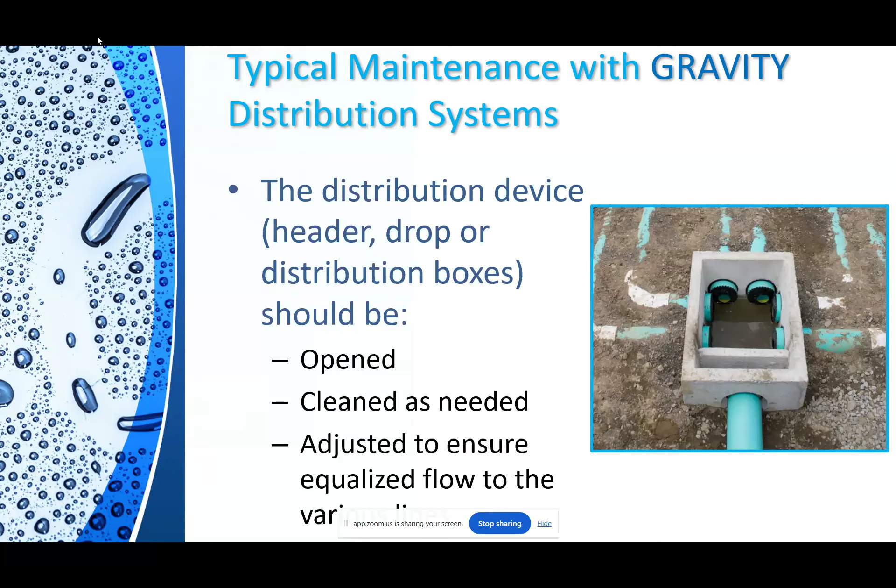Typical maintenance of pumps and controls. During the maintenance, confirm that the pump is working and set appropriately, that it's accessible, it's elevated, that your alarm works, that the tank with the pump may need cleaning if sludge is present, and recording of runtime cycles of pumps when available, and determining those flows.

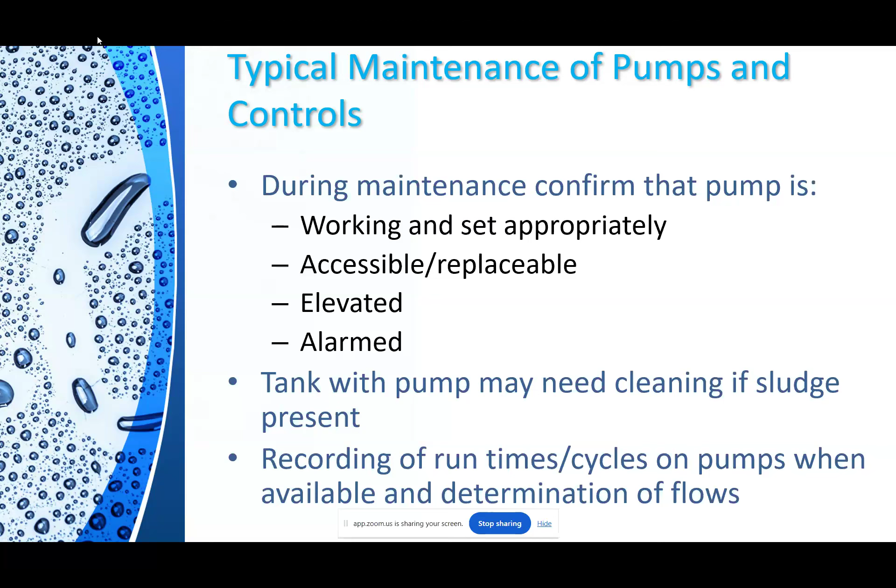Make sure that pump isn't running constantly, making sure it is being shut off, because that is the easiest way to blow out your pump. And then also making sure your alarms are working, everything is corrected, because those alarms are vital if you do have a backup in distribution.

Record keeping. Some jurisdictions require that a report must be submitted when service is performed on the system. It is wise to keep records of your system's design. So again, making sure that you have those records, and also making sure you just keep a copy.

If you ever go to sell the home, it is nice to be able to hand it over to the next homeowner so they're aware of what's happened with the septic system and any future maintenance that might come up, and also knowing your pumping schedule. If they have about the same size family, or are in the same area, then they're aware of where you're at and what you've been doing.

Private wells, have them tested. You want to look for coliform and bacteria. You want to do that every year. Nitrates every other year. Arsenic at least once. Lead at least once. And manganese before baby drinks the water. I would say same thing with nitrate on that as well.

Making sure that you're testing for that nitrate, especially if there's going to be any young children, especially infants within the house. And again, this is a service that RCAP provides for homeowners. So if you have a homeowner that you think may have an issue with their drinking water affected from their septic tank, please let us know. We can come out and we will give them the test and everything they need.

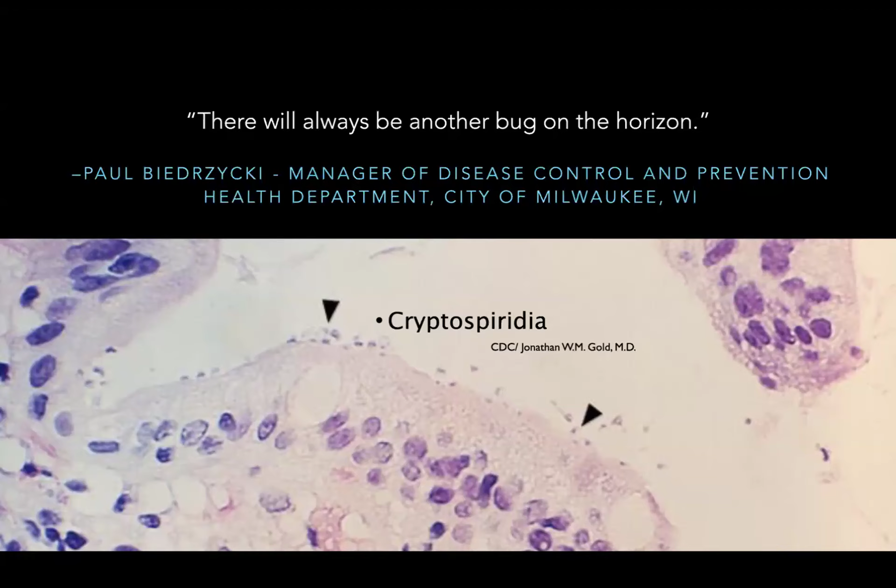Still to this day, cryptosporidium is listed as the leading cause of waterborne disease among humans in the United States.

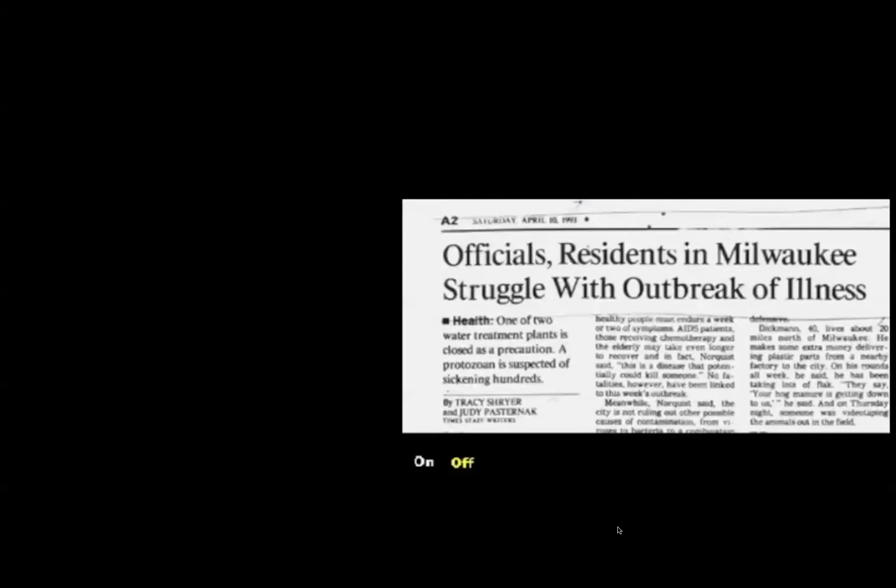In Milwaukee, health experts are taking a close look at the public water supply. In Milwaukee, thousands of people have been getting sick. Private distributors of bottled water are sending extra supplies as fast as possible. Health officials blame a microscopic parasite called Cryptosporidium. In the 1993 Cryptosporidium outbreak, over 400,000 people became ill with diarrhea, cramping, and nausea.

And we also recorded over 100 deaths, primarily in the immunocompromised community, and in particular, individuals with AIDS or HIV infection. People were beginning to experience symptoms of diarrhea.

It started to become more and more widespread, so the natural spot to look was drinking water. Tests were run on the water coming out of both of our water treatment plants. Then we found Cryptosporidium coming out of our Howard Avenue plant.

Milwaukee officials are shutting down one of the city's 2 water purification plants. Cryptosporidium is a parasite that's found in the gut or intestine of both humans and animals, and found in many surface waters throughout the globe.

Prior to 1993, it was not on our radar. It was not a reportable disease. EPA standards did not safeguard against Cryptosporidium because it was an unknown threat. Once it contaminated the water supply, the treatment plant had no capability to kill the pathogen, so it spread throughout the system. We saw an expenditure of $90 million to upgrade both water treatment plants.

Cryptosporidium was a wake-up call. It was a wake-up call for us. It's a wake-up call for the nation. Take care of your infrastructure before you have the kind of problem we had.

By no stretch of the imagination do I think we're out of the woods. Recent CDC statistics indicate that up to 32 million cases of waterborne disease occur each year in this country.

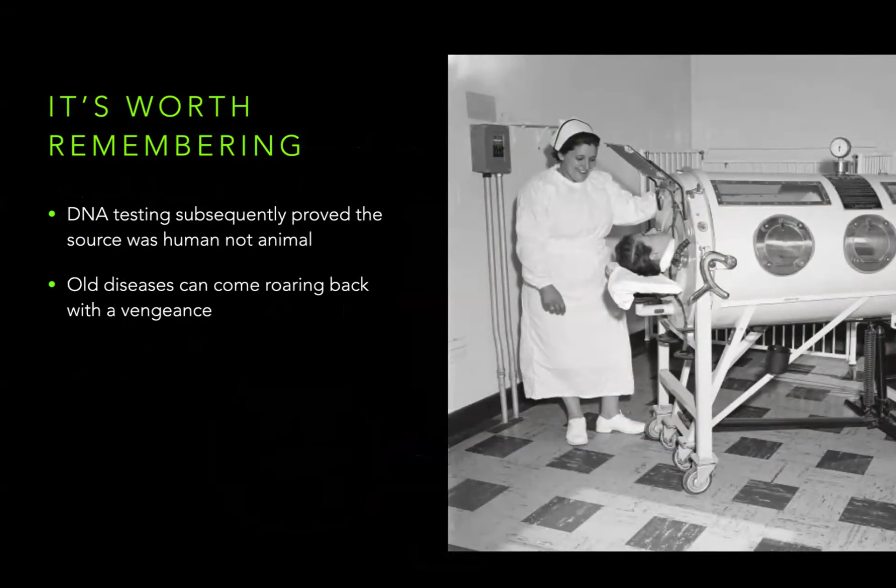And it is worth remembering that old diseases once thought to be not present anymore are coming back. And obviously since 1993, we've had a big input in DNA testing. At the time, it was considered that the Milwaukee outbreak came about because of contamination from animal sources, from feedlots getting into the water catchment system. But subsequent DNA testing showed that no, its origin was human.

So think about this. Think about the measles outbreak. Polio, we've seen cases of polio. I would never in my wildest dreams think that we would see polio and diphtheria and TB, which is interesting because if you're of our age section here, you probably all lined up in elementary school to have your jabs, and we all have a scar on our arm from our TB vaccination and never thought any more of it. When my husband was just hospitalized, they gave him another TB test because of the resistant strains of TB that are present.

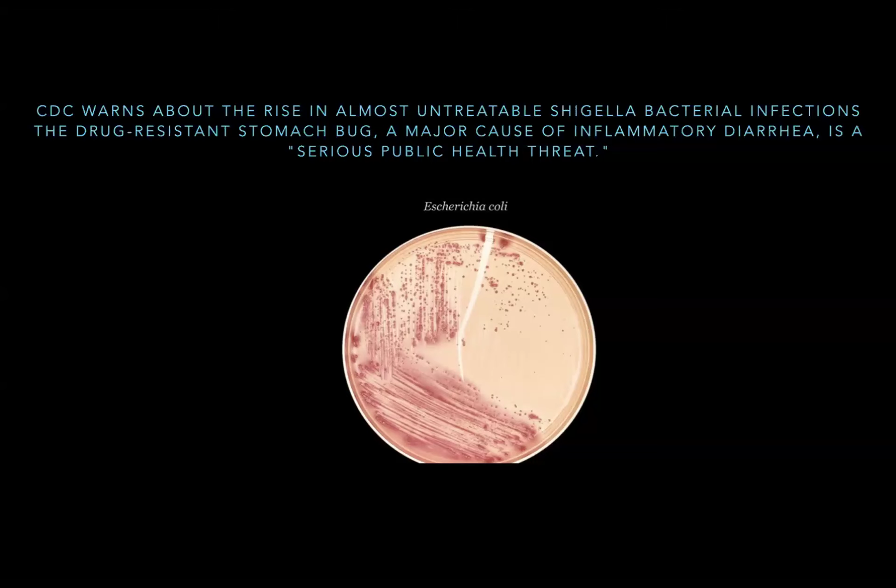Now, you might be wondering why we're talking about this. The reason is because of drug resistance, about the serious public health concerns from, and you should be aware as well, of not just drug-resistant E. coli, but MRSA. My husband had to have a MRSA test before he could be treated in hospital. Bear with me, we're getting to the point of why we're talking about bacterial resistance here.

Because we need to respect the profession. If our purpose here is to basically provide professional services for the wastewater service provider, the reason is that they deal with all of this. If they are handling human pathogenic material, biological material, if they are coming literally face to face with the business end of human beings, then they need to be aware of this. And it's a bridge, I think, I hope, for our organization, for you, and for the service providers we have.

to deal with, is we're in the same business. This is the reason we teach a 6-hour course for wastewater professionals on safety, PPE gear, bloodborne and human biological material handling, best practices for safety. And we do this both for their protection, but also for the public, for the people they work with. And all our clients, all of the service providers, become encouraged to then go out and be the public face

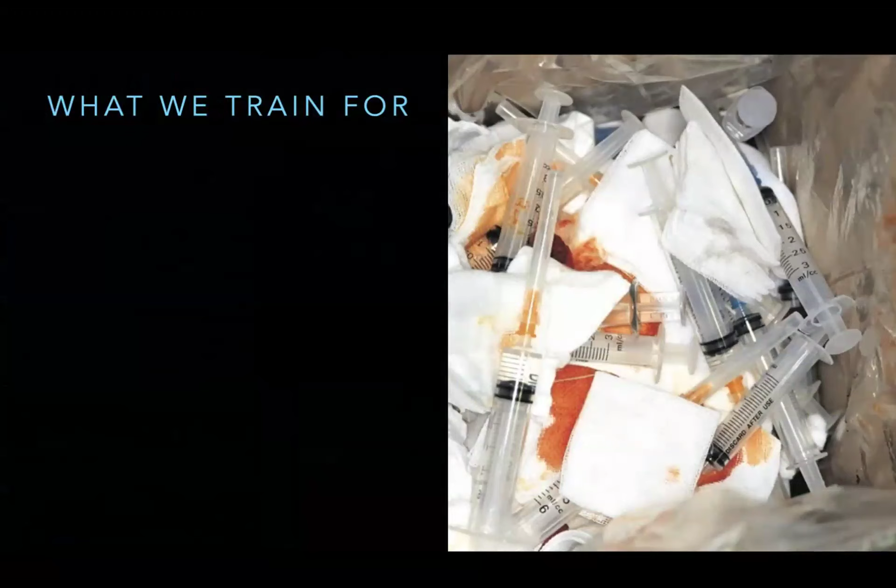Some of this obviously is going to be immediately recognizable to you, but these are what they train for and what we train people for. They're dealing mostly with rural areas. And unfortunately, rural areas are not immune from drug exposure and from opioid, meth, and particularly, as we were talking about, fentanyl.

All of this is something that your common or garden septic service provider has to be aware of. Unfortunately, the portable sanitation folks seem to get it more than anything. The common idea is, particularly if you are as an EH person going out and looking at things like music festivals, community events, fairs, community gatherings, temporary things where there are portable sanitation - this is obviously what you are going to be dealing with.

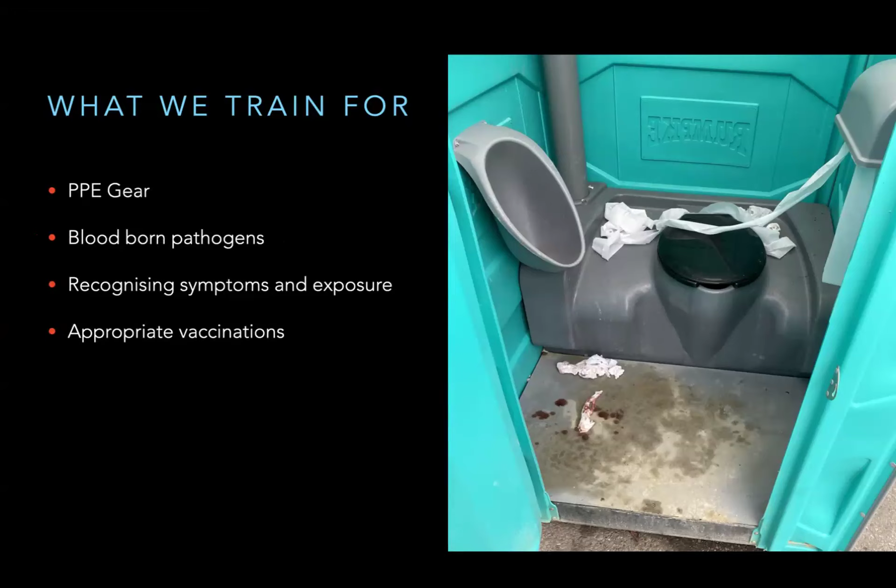So yes, they need to know about PPE gear and bloodborne pathogens. They need to recognize the symptoms. They know what to do if they reach in or something, as one of the service providers did, which was put his hand up the pipe, up the hose to see what was blocking it, and came out with 2 syringes stuck in his glove - that this is a reportable event and that he needs to go get checked out immediately. They need to have appropriate vaccinations, but as an employer too, of course, you need to know what the OSHA regulations are for somebody that decides they don't want to be vaccinated.

They need to know how to report the accident. And you may think this is a big public event, but this particular one was in somebody's backyard for a graduation party, which shocked the heck out of the guy that sent me this photograph. Just goes to show, I suppose.

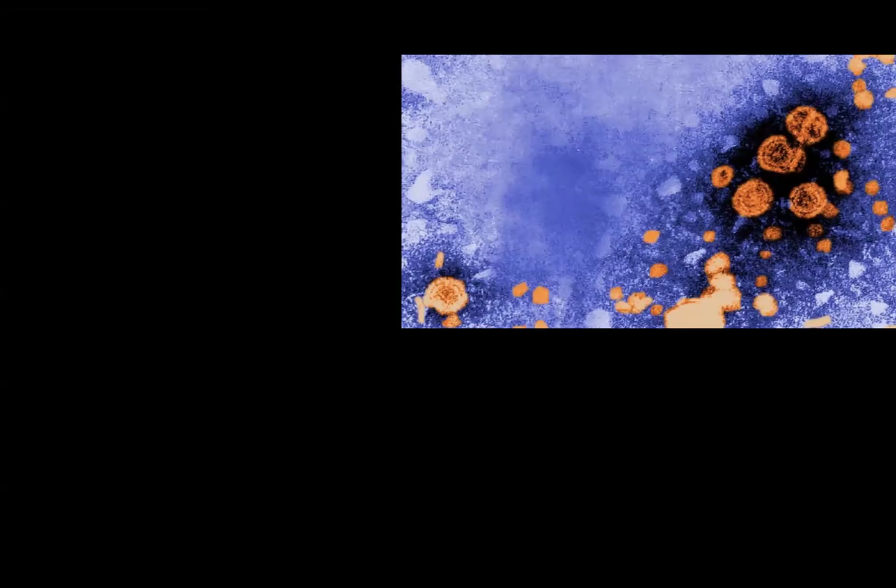In subsequent years, they've amended the testing, and now here as well as there, that DNA biomarker and the residual RNA has been found to identify things like hepatitis B. And the thing to remember and why it's applicable to you as well as to the service providers is that people can become infected and not feel sick. They can touch something - the virus can live for up to 7 days on an object. I'm not quite sure how this pans out with having 500 or 600 people swimming in the same place as you. But then we start looking at things like this nasty little thing.

I suppose I have to watch my language - I would call it something else, but it's drug-resistant bacteria. Again, poor husband got as many shots in the arm from things he might have been exposed to as what he actually went in there to be treated for. They are extremely concerned about people being infected by this, which is CRE.

Last I checked, there were over 9,000 healthcare-associated infections from CRE, but this stuff matters. The people who work in both environmental health and in the wastewater service profession know this. And that's one of the things that perhaps we don't do enough to communicate to the general public and to our elected officials - that this stuff is serious. This stuff can kill you. And of course, the obvious one is COVID. Benign as the title 'sewer mining for data' actually is, it really shows how careless we've become in paying attention to what the professionals do and also to the science of what we do.

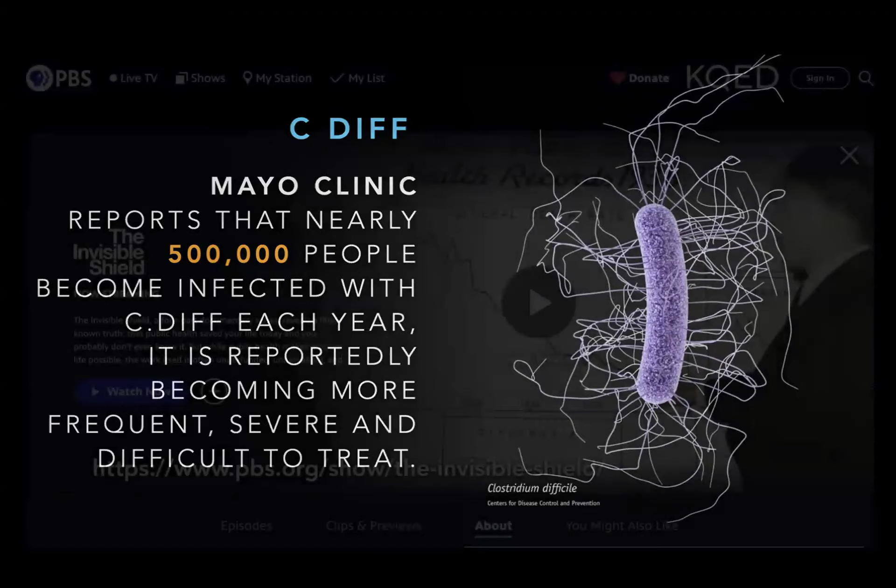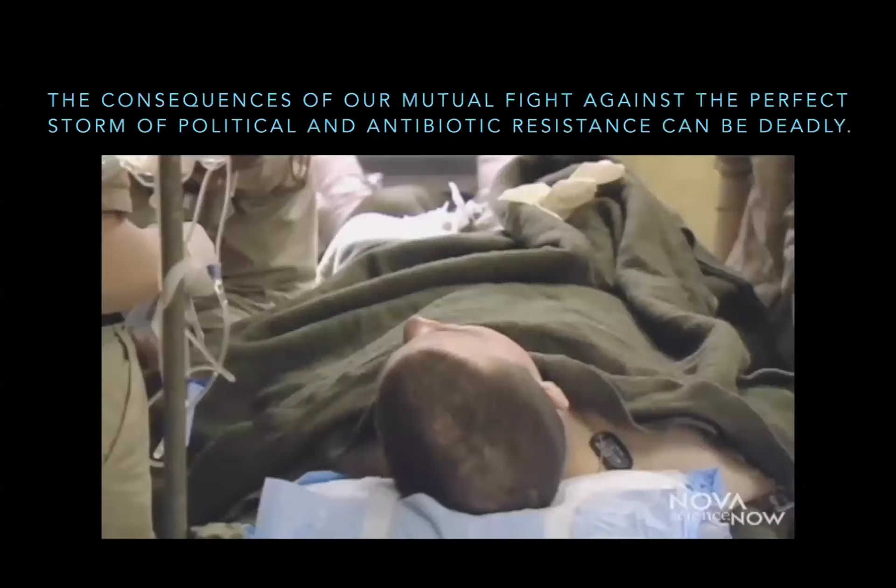We need to think about what this is and the transportability of antibiotic resistance. We live in a world where something that happened and originated in China can sweep the world. Here's an example from a few years back. I was a doctor in Iraq with the Air National Guard, and I can tell you from firsthand experience, the survival rate for wounded soldiers is a remarkable story. But it's one with a downside.

That downside comes in the form of a tiny microbe with a powerful punch. Here's the culprit. It's a bacterium called Baumannii, referred to in Iraq as Iraqibacter. Like most bacteria, this tiny single-celled organism lives in colonies and is constantly reproducing, simply by dividing and dividing again. A single bacterium can give rise to 5 billion trillion in only a day.

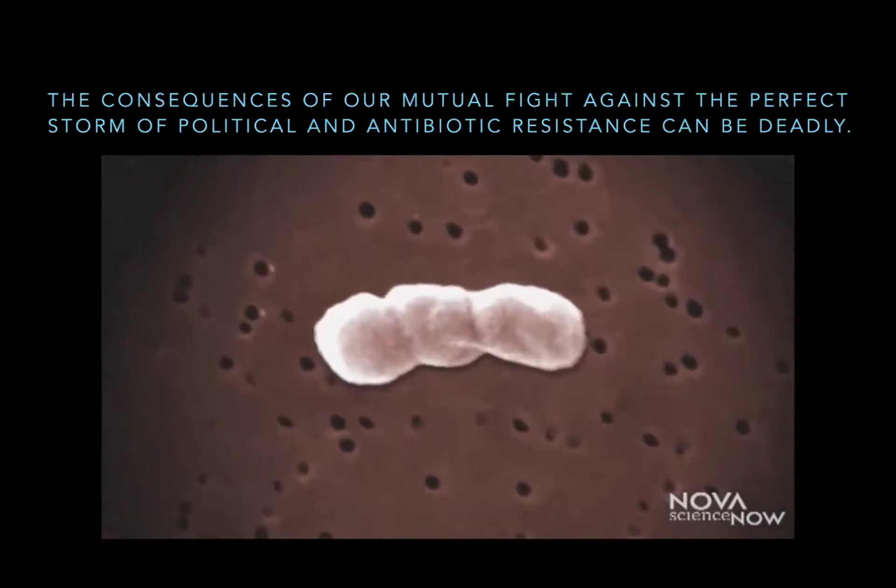This bug used to be relatively harmless, yet somehow it's found a way to transform itself into a drug-resistant killer. Many soldiers and civilians are picking up this deadly microbe in hospitals along the evacuation chain out of Iraq and bringing it back home to America, where it's infecting even people who have never seen a battlefield. It has this ability to hang around in places where it ought not, like on doorknobs and pillowcases and the like, where it can survive for weeks.

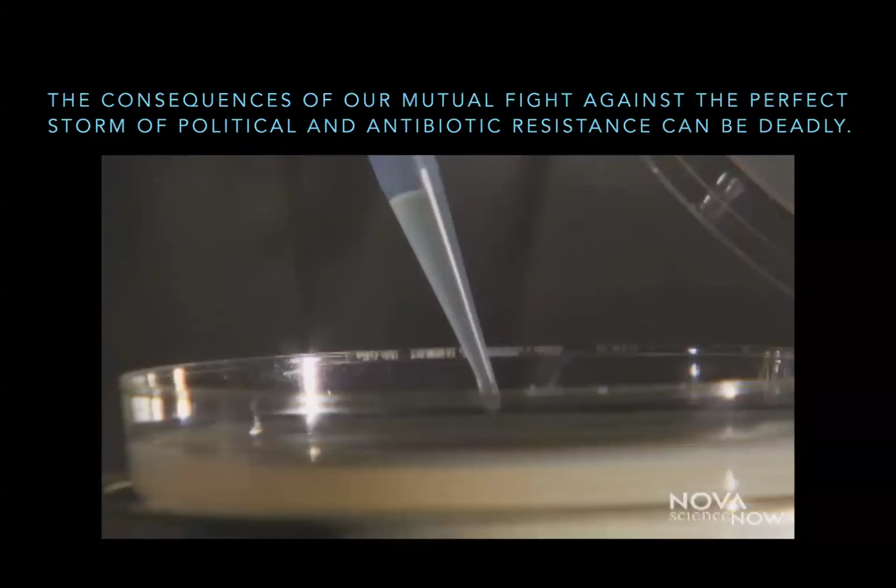So why not simply use an antibiotic like penicillin to fight it? But something has changed. Now the bugs are fighting back. Microbiologist Mike Smith demonstrates how drug-resistant this bug has become. He places colonies containing millions of bacteria in several petri dishes and confronts them with imipenem, an antibiotic so strong it's nicknamed gorillacillin.

After 12 hours, all the bacteria should be dead, but they're not. Unfortunately, this is the kind of thing that we're seeing where certain colonies are surviving. So the entire population now of remaining bacteria are imipenem resistant. So this is the strain. Smith and graduate student Tara Janulis prepare a sample of Baumannii. Its DNA will be sequenced, one letter at a time.

The results reveal that Baumannii has large sections of genes that don't belong, foreign genes that are giving it resistance to antibiotics. There is a multi-drug resistant strain that took 45 different drug resistance genes and stuck them in one spot. This should be alarming because that's what this bug can do.

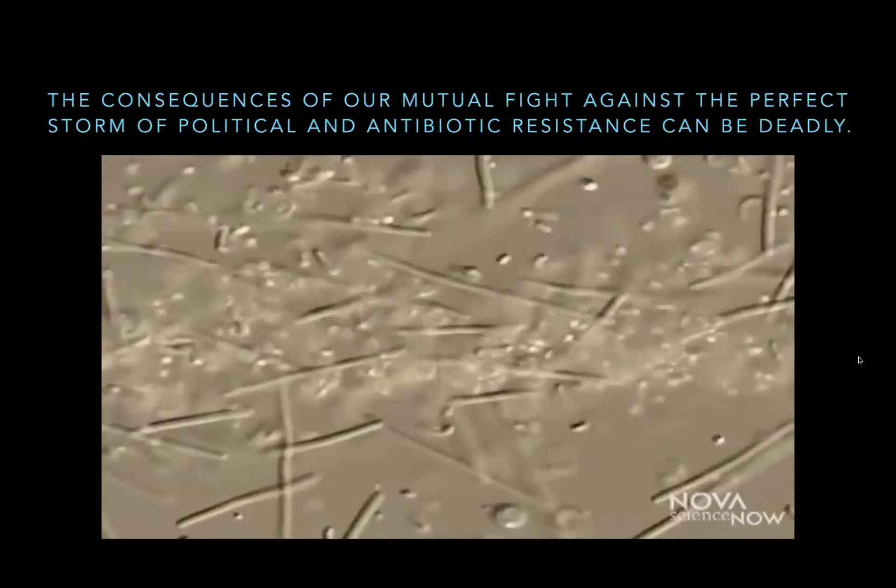How is this possible? There's only one way we get our genes, and that's from our parents. It's called vertical gene transfer. But it turns out bacteria can also get genes in a process called horizontal gene transfer. One way that happens is when two bacteria get together for a little friendly conjugation, the microbial form of snuggling. They form a connection and squirt DNA into each other. Turns out Baumannii has been getting a little too friendly. Could that be what's making it so nasty?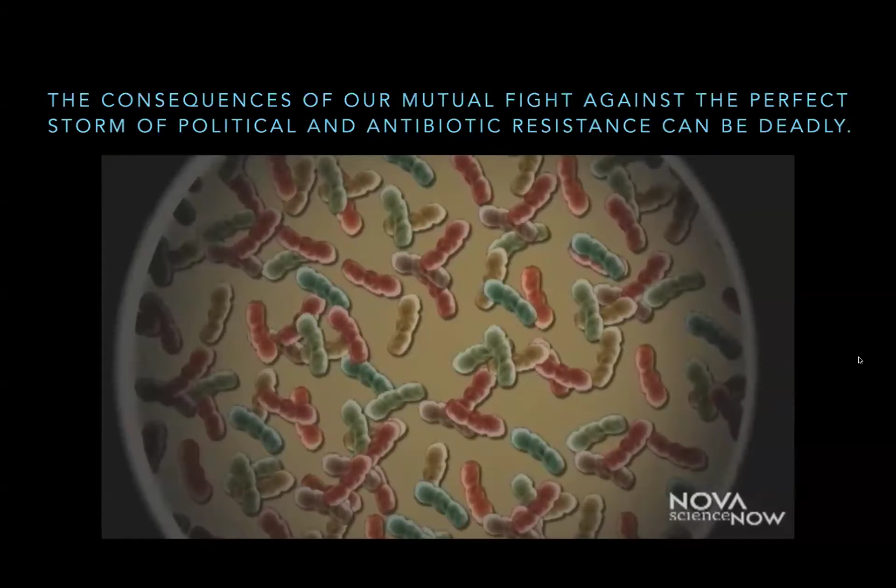To find out, Mike Smith zaps a colony of Baumannii with electricity, creating over 1,000 mutant bugs, each one different, each one missing one known gene. He takes these mutant microbes and feeds them to some microscopic worms. And it turns out that when these worms eat disease-causing bacteria, it often kills them too, just like lethal bacteria can kill us. But if Mike has succeeded in zapping out the lethal genes, then some of his worms should survive. Will it work? He'll find out at dinner time.

The worms that survive give Mike the information that he needs to know who Baumannii has been getting friendly with. It turns out one of the deadly genes comes from a well-known killer, the bacteria responsible for Legionnaire's disease. It's taking in drug resistance genes and it's developing drug resistance. It's taking in virulence or disease-causing type genes and it's using them. With the addition of some new genes, Baumannii becomes more lethal and harder to defeat all at the same time. It's an ongoing battle, not easily won.

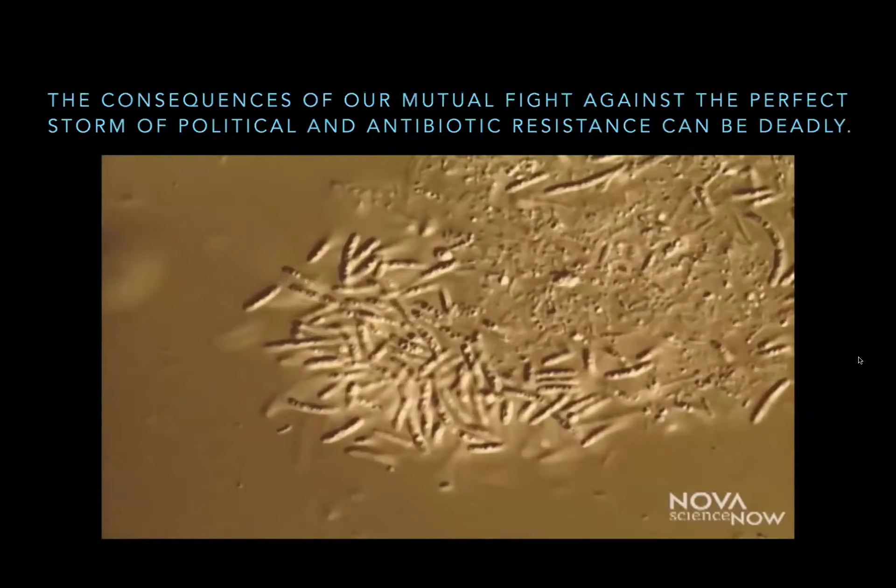Perhaps instead of trying to just overwhelm them and kill them, maybe we can coerce them into doing something that they weren't thinking about doing if we understand how they communicate. But bacteria have been around a lot longer than we have, and they are very good at adapting to anything that we throw at them. So for now, it's a matter of early intervention, better hospital hygiene, and good medical care.

Because you, me, all of the service providers we work with, work at the business end of human beings. And if there's two things in life that are certain, which are death and taxes, then maybe we should add a third one, which is everybody poops. And this is, again, what we train for: PPE gear, confined space, digging and trenching, all of the things that could lead to some really concerning OSHA violations.

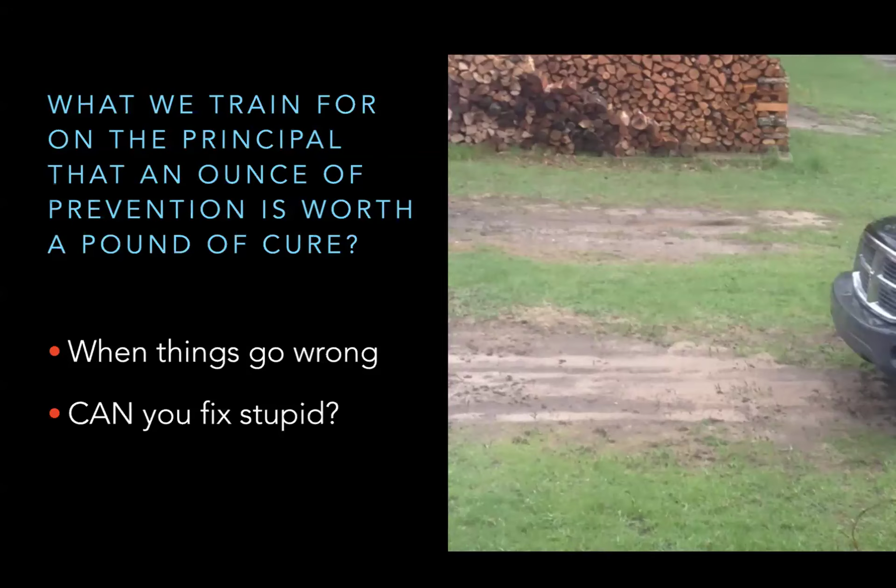But these are the things, again, that service providers are looking for. And some of the things that the previous speaker talked about, yes, if you've ever seen the Blue Collar Comedy Tour, you know that you cannot fix stupid. But this bare, flat piece of unprepossessing looking backyard is actually the septic tank and the drain field. And you can see it was a nice open area. So the owner thought it was just a good place to park and pile his wood on the back side of it. So yeah.

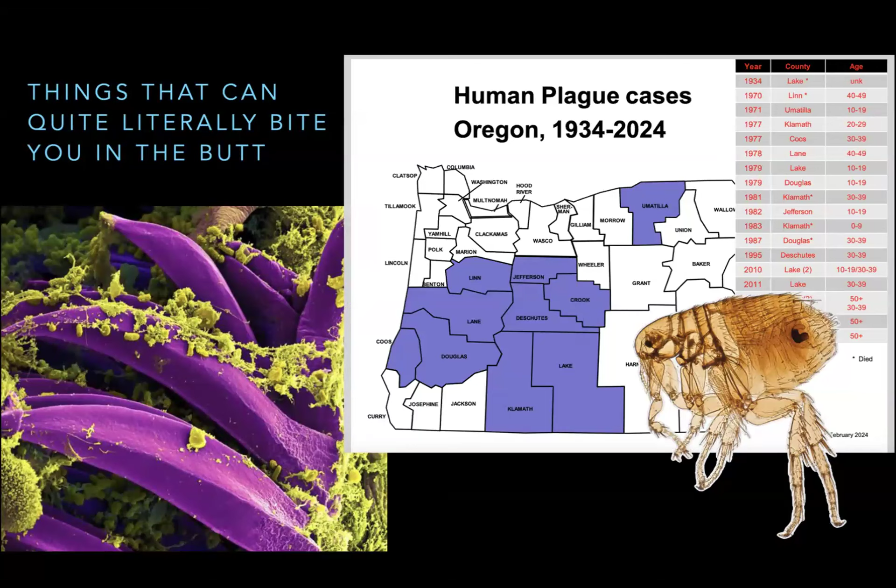We live, regardless of what other people may say or profess, in a time where the climate is changing. We tend not to use the word climate change because it tends to get some people very upset, but you can't deny that areas that were wet are getting wetter, areas that were dry are getting drier. We're experiencing extended periods of drought and heat followed by monsoons of rain. And if people like to move away from that, well, so do the insects. And tick-borne disease is an ongoing problem.

And everyone who works in this business, you, me, the septic service providers, are in people's backyards. They're in places where it's quite possible that they're in overgrowth, and they're quite probably going to be encountering these. And in Illinois, you are prone to American dog ticks, Asian longhorned ticks, blacklegged ticks, brown dog ticks.

And I put in there the Lone Star tick. Now, the CDC website says that you don't have them, but it also says that Michigan doesn't have them either. And there have been reported cases of Lone Star ticks found in Western Michigan. So I think it's fair to assume that you've got them too. So these are things that can literally bite you in the butt.

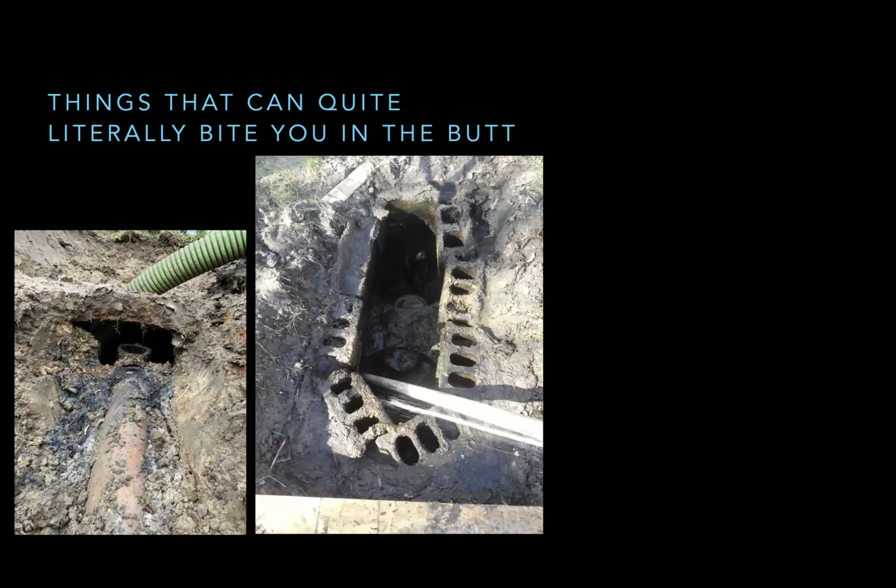This one's ingenious. As you say, it's pretty homemade. Those are actually two, I think they're 15 or 20-gallon pickle crocks put together. And one is positioned a little bit lower than the other one, so when one fills up, it spills over the top into the next one. Quite ingenious. And this one is one of my favorites that was sent.

This is a good example why you never leave your neighbor's teenage kids to house sit for you when you go away for a week vacation, because this is what you might find when you come back. And if you think back to all of the pathogens and blood-borne things that you can contract if you come in contact with this, it's a pretty unpleasant thing to pull out of anybody's drain. So

we also, of course, need to talk about basic electrical safety, because some of the advanced treatment systems that we've looked at refer to electrical components. And if you're not familiar with arc flash, let's see if this will play for you. And watch the screen again. 480 volt, 3-phase arc.

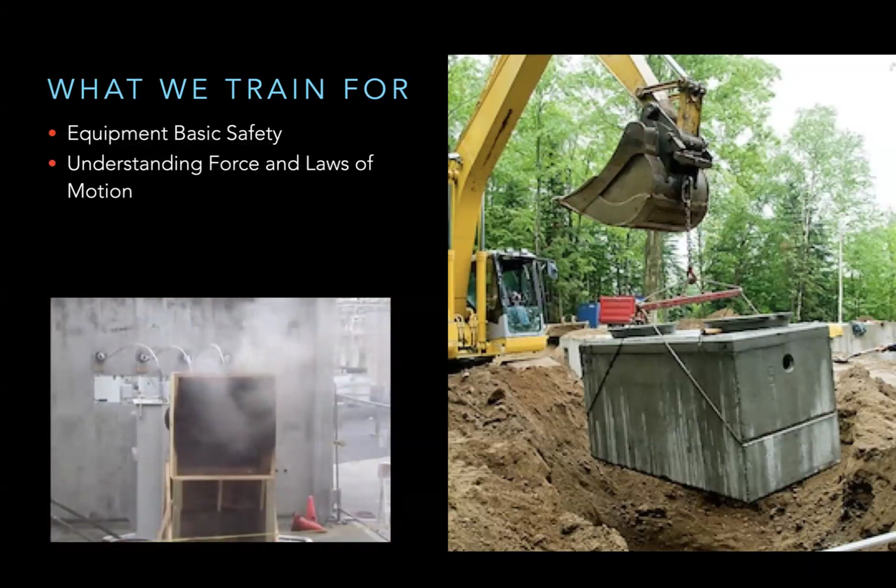Yeah, the explosive power of arc flash and the danger inherent with electrical components from advanced systems is something that needs specialized training. And part of the reason we do this is to give people enough knowledge to realize when they should not be touching anything on this. And obviously that includes you too. So again, we're talking about what we train for.

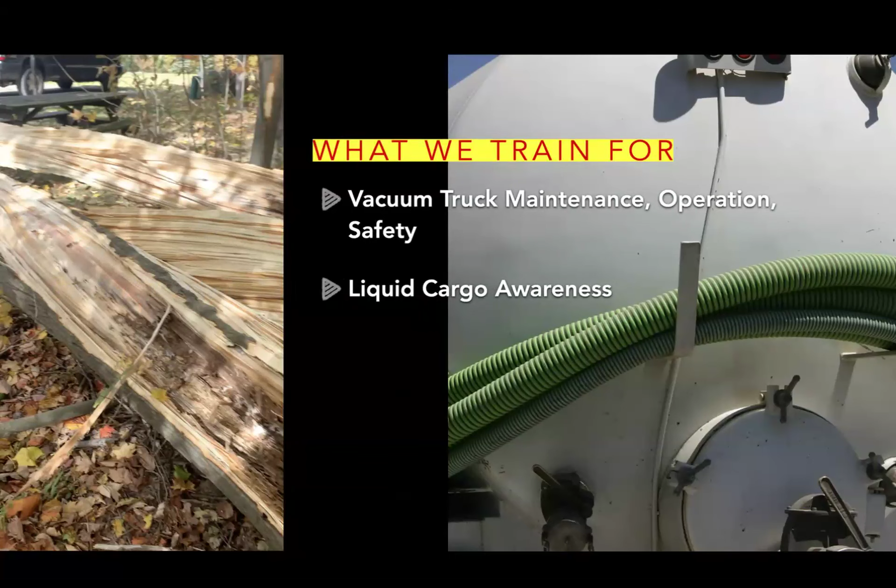Vacuum trucks are inherently dangerous pieces of equipment. Injuries, deaths happen every year from people who do not know how to properly respect the power inherent in those pump systems. Liquid cargo awareness: as you're driving down the road, this cargo is liquid. It doesn't stop on a dime. If you try to, it will keep going.

And things that can happen on the job site. And the note here is remember not to park by the trees next time. So watch what happened to this guy. That's how close he came to losing his life and his truck.

So, in conclusion, we're wrapping up here now. We're privileged to work in a profession that safeguards people and the environment at the most fundamental levels of life and safety. We see the daily assaults now on the hard-won knowledge and the science of our shared professions. And sometimes it can seem like we're losing that fight. But to learn the lessons, are we smart enough? And in the end, if we don't, who will pay?

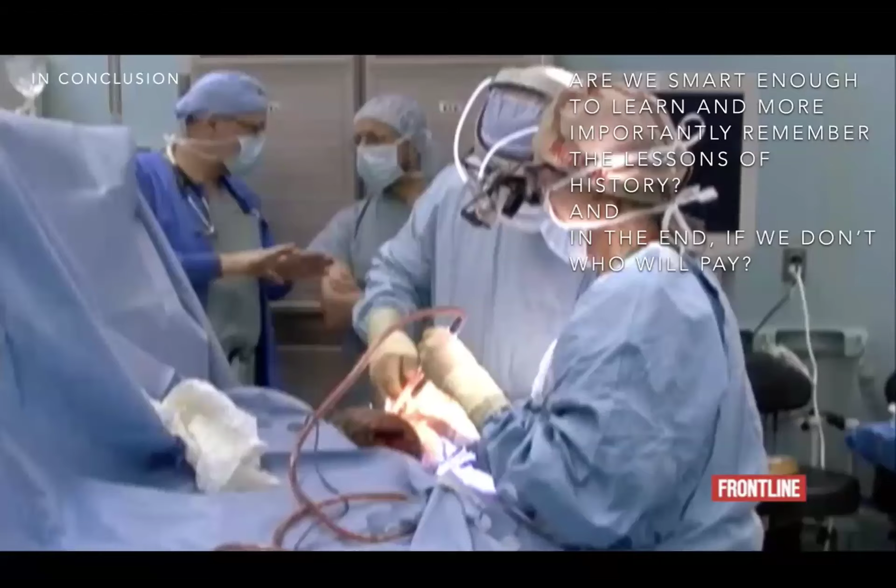The prospect of life without antibiotics is barely imaginable for a world that has had a cheap and plentiful supply of them since the end of World War II. They are a staple of modern medicine. It's hard to recall a time without them, when an infected cut could kill a healthy young person in a matter of days. But it's now clear that we are heading back in that direction, that the miracle of these drugs is slipping away.

Antibiotics are unique drugs. They're not like any other class of drugs. 50 years from today, the cholesterol drugs we have now will work just as well as they work today. The cancer drugs we have now will work just as well as they do today. That's true of all the other drug classes. Antibiotics are the only class of drugs that the more we use, the more rapidly we lose.

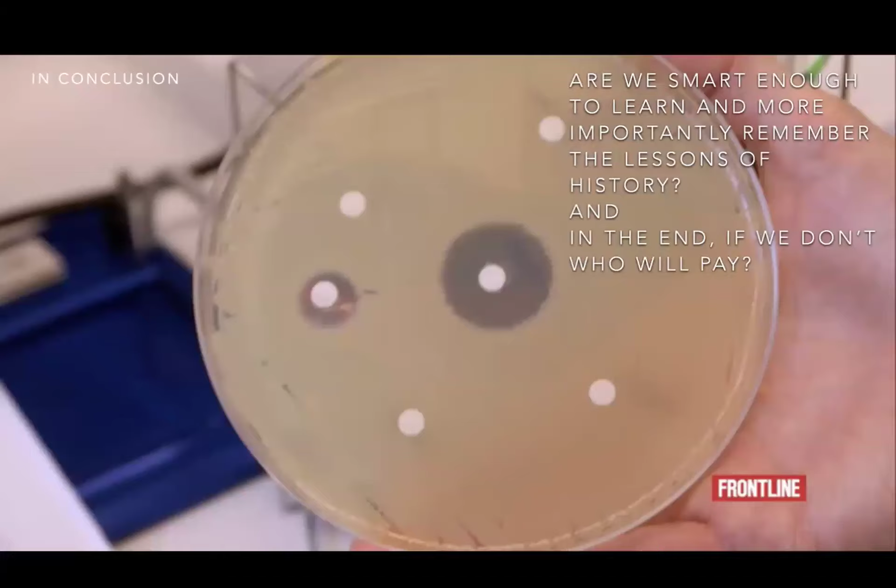When you use it, it becomes less effective for me and vice versa. That is the essence of antibiotic resistance. The more you expose a bacteria to an antibiotic, the greater the likelihood that resistance to that antibiotic is going to develop. So the more antibiotics we put into people, we put into the environment, the more opportunities we create for these bacteria to become resistant.

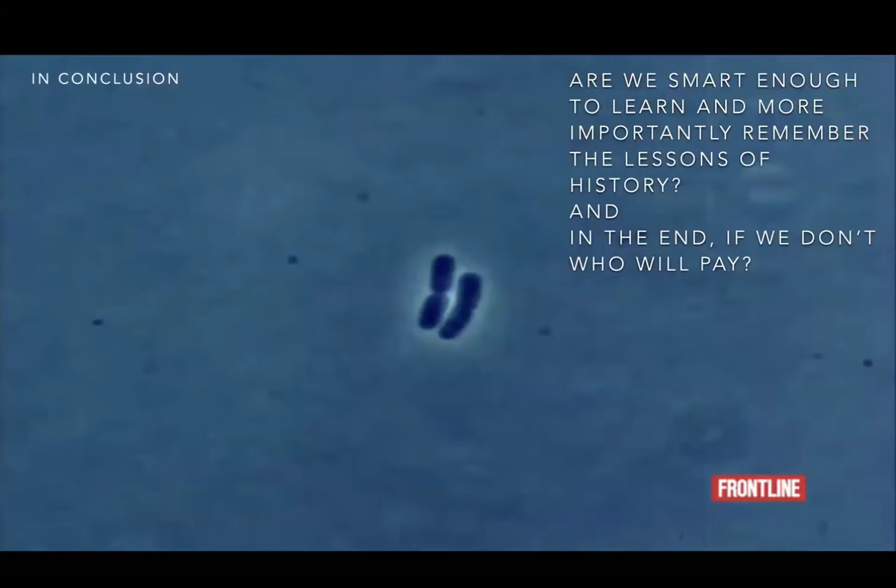People forgot about the danger of resistance because the drugs were so effective. What they had forgotten was the warning that Alexander Fleming himself, the man who discovered penicillin, gave us in 1945, that resistance was already being seen, and the more we wasted penicillin, the more people were going to die of penicillin-resistant infections. Bacterial resistance is largely inevitable, but it's also something we have certainly helped along the way.

We've fueled this fire of bacterial resistance. These drugs are miracle drugs, these antibiotics that we have, but we haven't taken good care of them. Public health officials estimate that up to half of all antibiotic use in the U.S. is either unnecessary or inappropriate. And in overusing these antibiotics, we have set ourselves up for the scenario that we find ourselves in now, where we're running out of antibiotics.

It's a sobering thought that the next time you have to go in or you admit a family member for a hospital procedure, they're going to need antibiotics.

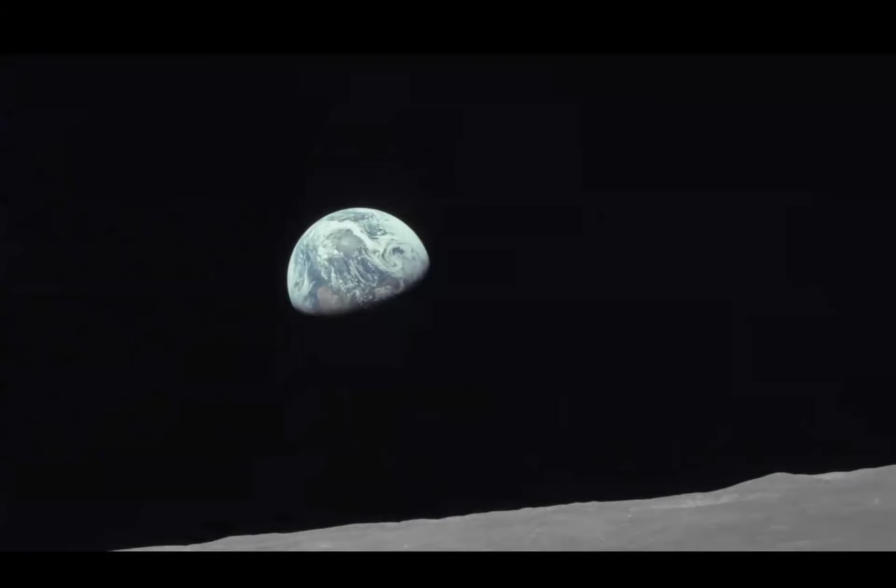It's worth reminding ourselves of this, sometimes it can seem so depressing, what we have to deal with. This photo is the iconic Christmas Eve photo from 1968, taken by William Anders. At that time it shows them orbiting the moon, and it became known, of course, as Earthrise. It was at that point the biggest audience in television history.

How many billion people tuned in to watch that? I think if you're our age, you all remember where you were when we had our first steps for humankind.

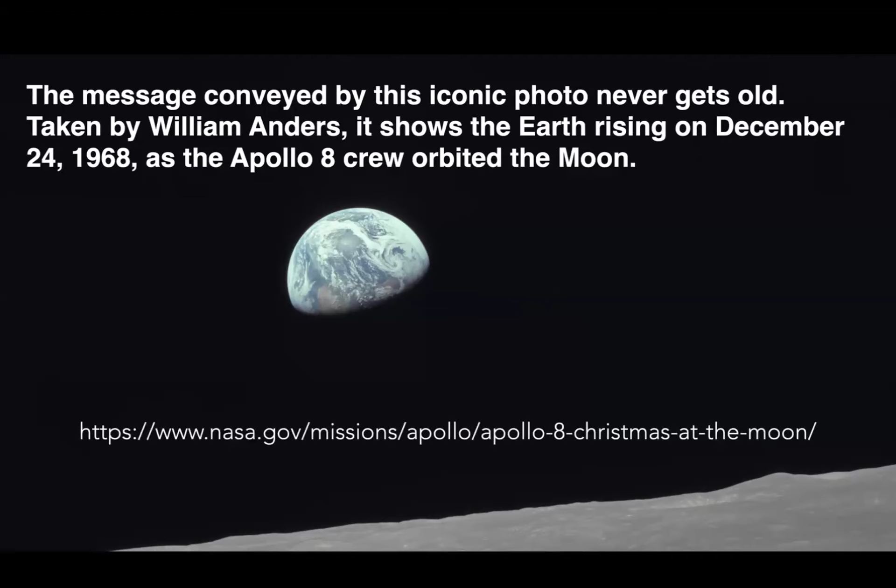But every day that we work for, every day that we have to do this job, I feel privileged. This is something that gives me a lot of pleasure, makes me angrier than heck at times, and I'm sure it does you too, but it's a privilege.

Politicians come and go, but in the end, we have to hold on to what we do and be proud of what we do. I'm not sure if this will play, but I will play this as we go out.